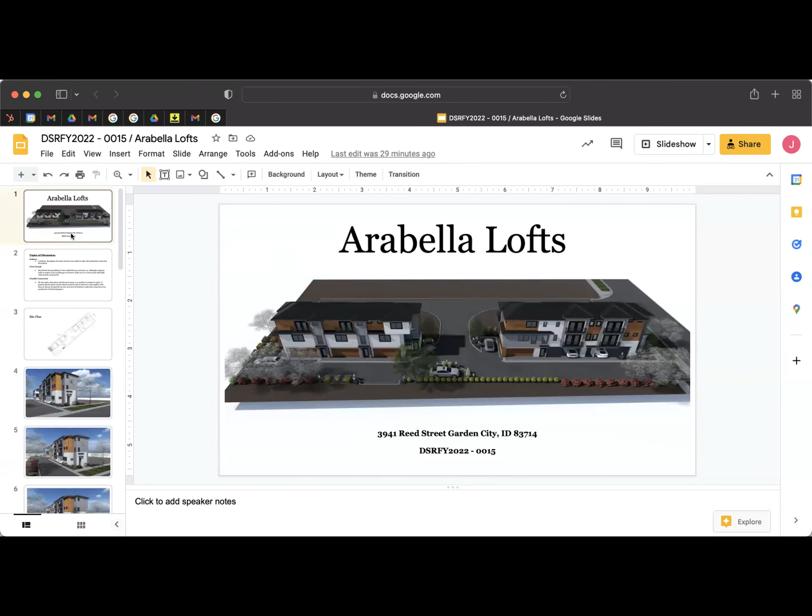To keep this brief, because we have talked about this project a couple times, things that we have addressed since the last design review hearing are the pathway that was asked to be provided throughout the subdivision. We have provided that all the way through, as well as addressed the front facade of the building facing Reed Street.

We also, from the last meeting to now, discovered that there's a possible connection point in the back that could help our back parking spaces, which were an initial discussion where there was an issue that they might be a little too difficult to back out of. But there is currently now a possibility to connect to a future development that is starting the process with Garden City next to us.

So we have been working with them. Nothing is finalized and we are farther along in the process than them, so we can't say this is 100% for sure, but we've worked with a couple of their teammates and overlaid our subdivisions to show that they could, and they almost do lay out perfectly. So that's just one thing I wanted to note.

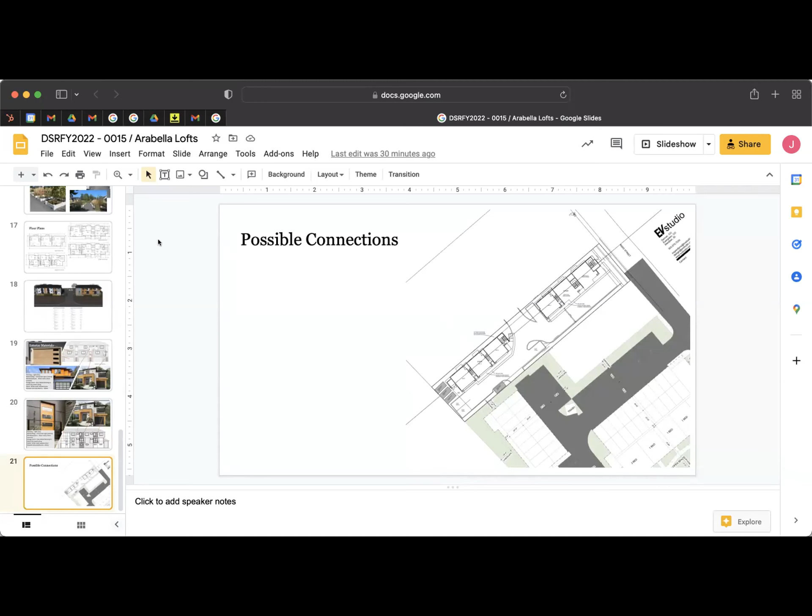But going back to some of the corrections that were made, the front facade of the building facing Reed Street, we have added the logo as well as the apartment or development name. It does appear a little small in the renderings, but as they're actually constructed, they will appear a lot larger on the building. We also added the awning over the entrance to the front, as well as some bike racks and the pathway that rolls all the way through the subdivision.

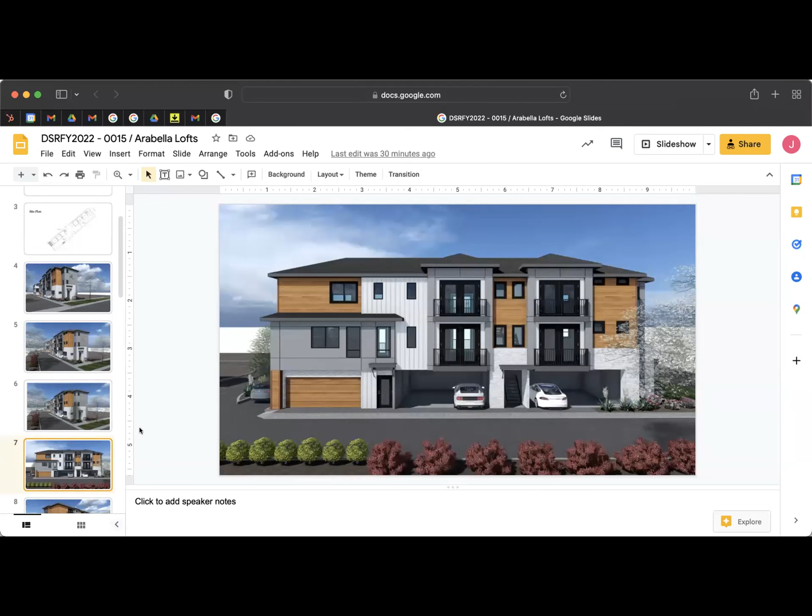But the pathway has been provided all the way through the subdivision and to the back entrance of the back building.

Lastly, it was requested that we show some renderings of the middle parking space, the island, the little landscape island that we have. So I provided a couple of those just to show some of the landscaping. We didn't do as much landscaping in this area now, knowing that there could potentially be a connection with that neighborhood or the development next to us. But this is currently what we have envisioned for this space, just so that when you're looking down, you're seeing landscaping and not so much of a car.

And those are the corrections that I have from our last design review.

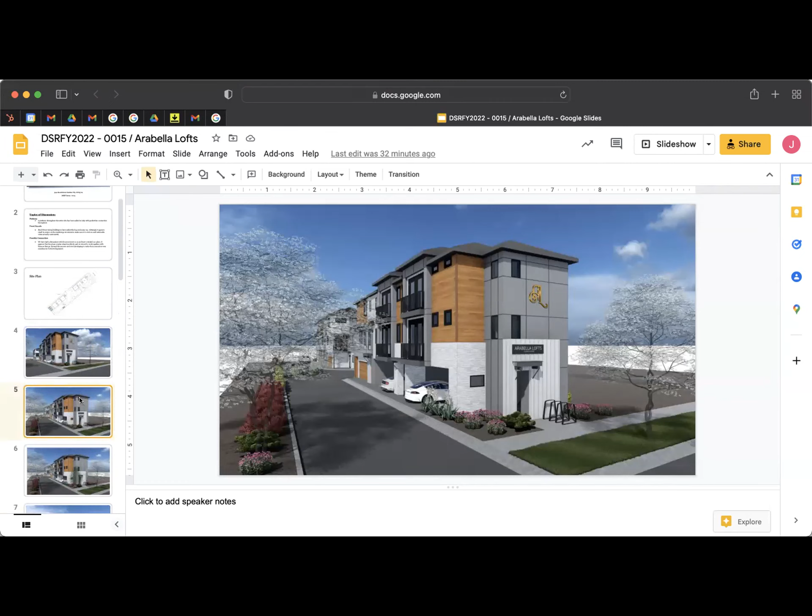Thank you. Any questions for Ms. Delgado? All right, seeing none, I'll turn it over to Ms. Veal for a staff report.

Good afternoon. I'll also keep my discussion a little bit sweet and to the point. There were new documents submitted on October 5th, 2022, in an attempt to resolve the outstanding code compliance issues and comments made by both the committee and the design review pre-application staff report.

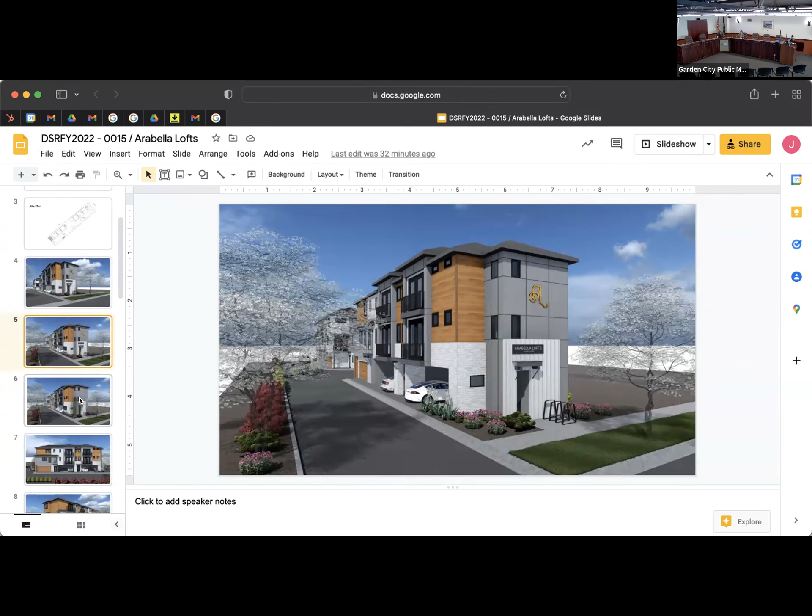The application does, however, remain non-compliant by not providing adequate common open spaces or the required street tree quantity or species. There are remaining discussions left to be had that include the front facade of that unit facing Reed Street, the perimeter landscaping, and the vehicular circulation and functionality, as well as that pedestrian connection through the common drive location.

And per code, these areas cannot count towards the minimum landscaping requirement of 5%. So in identifying these, as Jorre is showing on the screen right now, the green areas, most of it's in the setback, so it's showing non-compliance with this section of code.

Additionally, the site appears to be deficient at least one street tree. The tree proposed is a spring snow crab apple, which is not necessarily a qualifying or viable street tree, as the intent of a street tree is to provide high and wide branching canopy to allow for shade and environmental benefits.

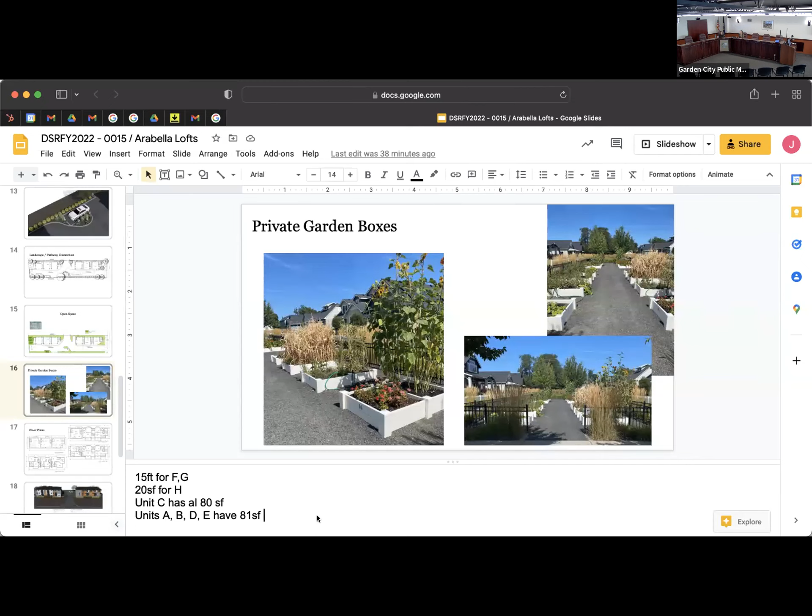I'd also like to note this wasn't included in the staff report, but it was included as part of the packet. Jorre, the applicant, mentioned coordination with that adjacent property owner. That adjacent property is considering a multifamily development. Nothing is solidified yet, it's just been in conversation with staff, and staff has reached out to both the applicant of this application and that future application of the adjacent property to try and coordinate at least some kind of vehicular connection, which Jorre also spoke to today.

Staff included a Word document converted to PDF, just to highlight the surrounding properties that are currently in construction or entitlement off of Reed Street. So we're seeing a lot of construction going on there, and it's just a way to show the committee as well as the public how that neighborhood has changed in the last year or two.

And with that, I stand for questions. Any questions by the committee for Ms. Veal?

Hanna, how much green space are they deficient, percentage wise?

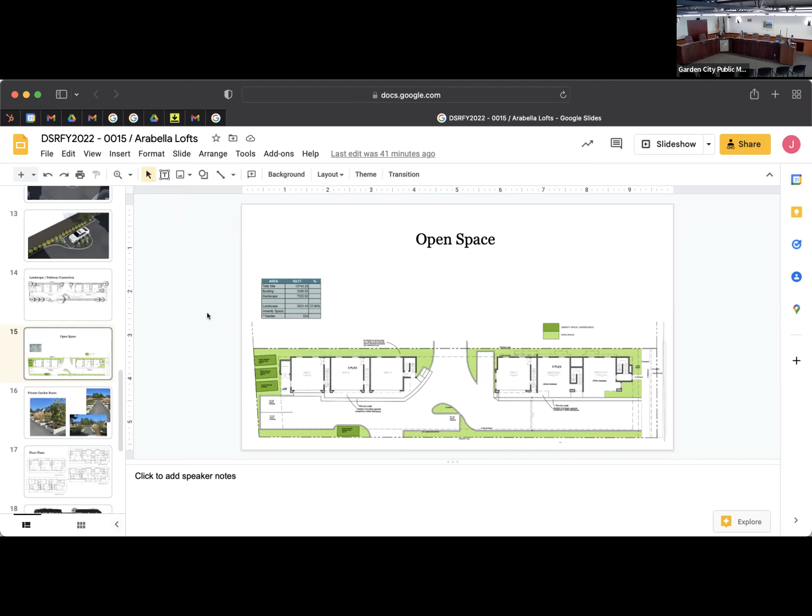And can private open space square footage requirements be in the setback? Yes, I believe so. So it checks that box, but not the other box. Got it.

Okay, all right. Not seeing further questions, so with that I'll open up the public testimony portion of the public hearing.

Is there anyone in person who wishes to testify on this matter? All right, seeing none. Is there anyone on Zoom who wishes to testify? If so, either utilize the raise your hand feature, or there are few enough people that you could go ahead and speak up.

All right, seeing none. I'll turn it back over to Ms. Delgado for any rebuttals she'd like to provide. I have none, thank you.

Thank you. And then I'll close the public hearing and turn it over to the committee members for discussion.

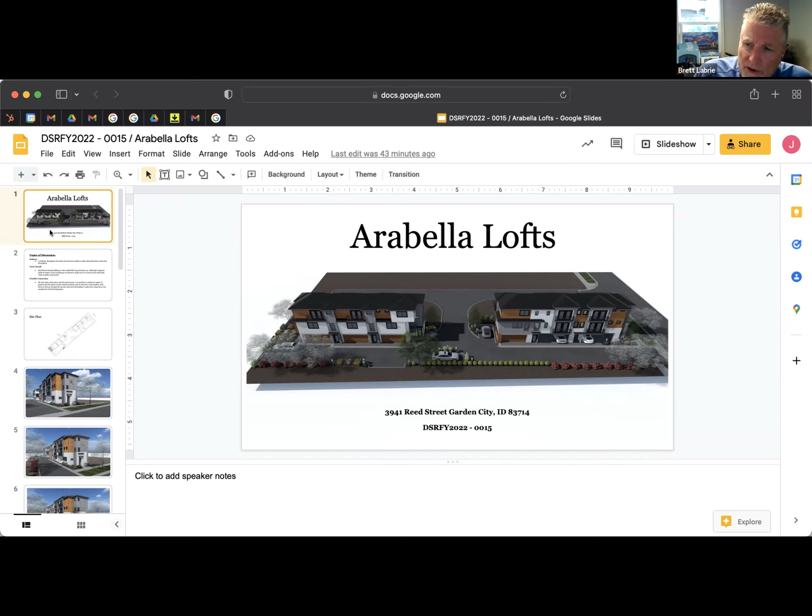So that's one item that I've got concerns with. The other one is this sidewalk connection. I don't see how it terminates into the sidewalk at the front of the development.

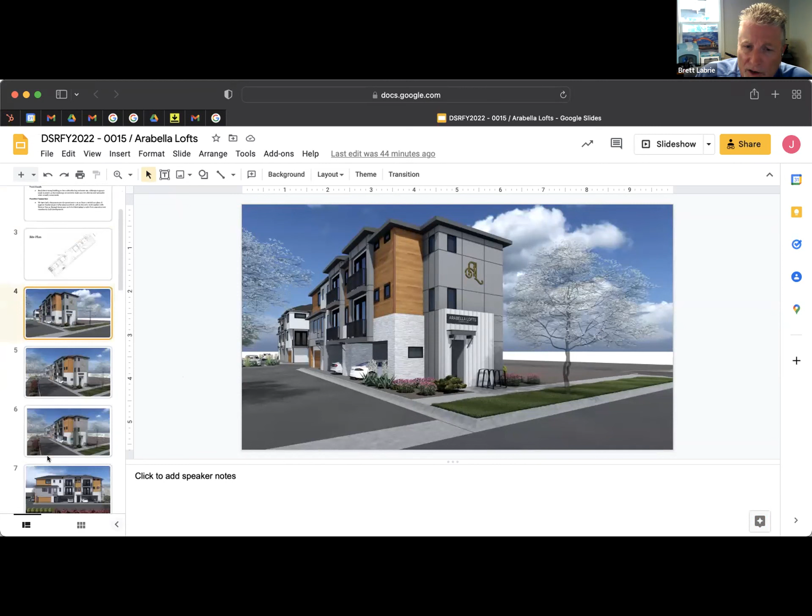It looks like there's landscaping that impedes somebody from accessing that. It also does not access the end unit. I think it kind of stops short of getting all the way back to where those garden beds are because of the parking at the very end. So it's disconnected. There's a sidewalk right there behind that car.

Well, is that the sidewalk or is that the rolled curb element? It was very difficult to understand from the civil drawings, and the landscape drawings were indicating this larger rolled curb and then sidewalk. So it's not clear to me where the sidewalk is and what's curb.

Yeah, so this pad of concrete actually comes out farther past this. Just the car kind of in this rendering is in the way. I could probably get a better rendering to show for that. I just don't have one right now. I could probably ask for a rendering that removes this car so you can see that pad comes all the way out.

So what is that little bump out on the rear there? Is that somebody's access? This is a mechanical room in the riser room. Okay, so it actually doesn't reach all the way to the garden, is what it looked like. But anyways, I'm just making sure that whatever connection spine is there actually goes the full way into the development. Yeah, this does connect, and that is just the riser room and mechanical area.

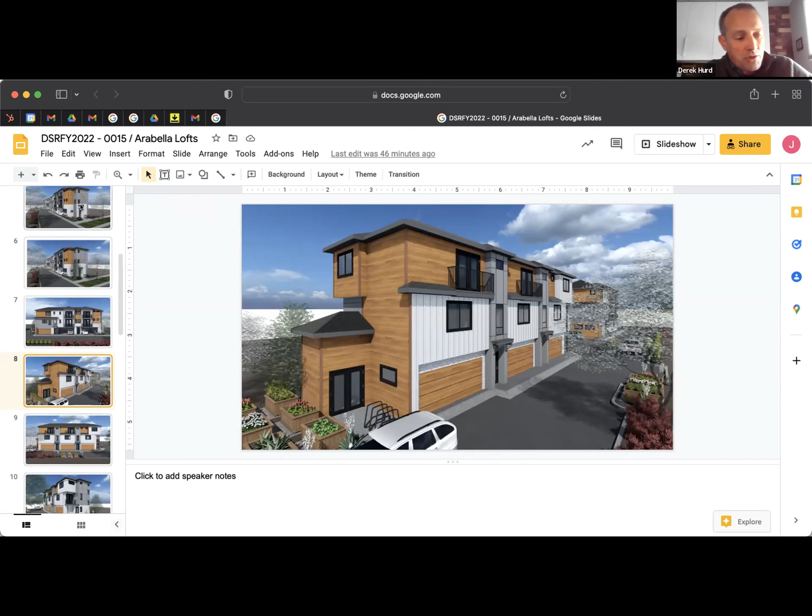Yeah, those were kind of my initial thoughts. Yep, and you hit all the big ones. My impression of the front elevation was the same as yours, that it almost took a step in another direction - now it looks commercial in essence, but it is missing.

It's still missing the street front engagement. There's no windows on the street front. It's just a blank door that goes basically to a stairwell. There's no eyes on the street in essence. So that end unit needs to be an end unit and engage with the street. And then all the other comments as well.

I read it the same way, Brett, that it looks like that sidewalk ends at the door to the last unit. And to me, it was like, okay, it's getting where it needs to go. It doesn't need to go beyond - the sidewalk doesn't need to go in front of the last garage because we've gotten to the front door, but...

you mentioning the community gardens and stuff, I think that does need to extend beyond. And it does read in the landscape plan from Stack Rock Group that sidewalk ends short of getting all the way down to the bed. So I think that needs to be addressed.

The landscaping around that parking island that's kind of dead center of the site, I think the landscaping around there is now satisfying the terminal view that used to just look at that car sitting in that parking spot. So I think that satisfies that.

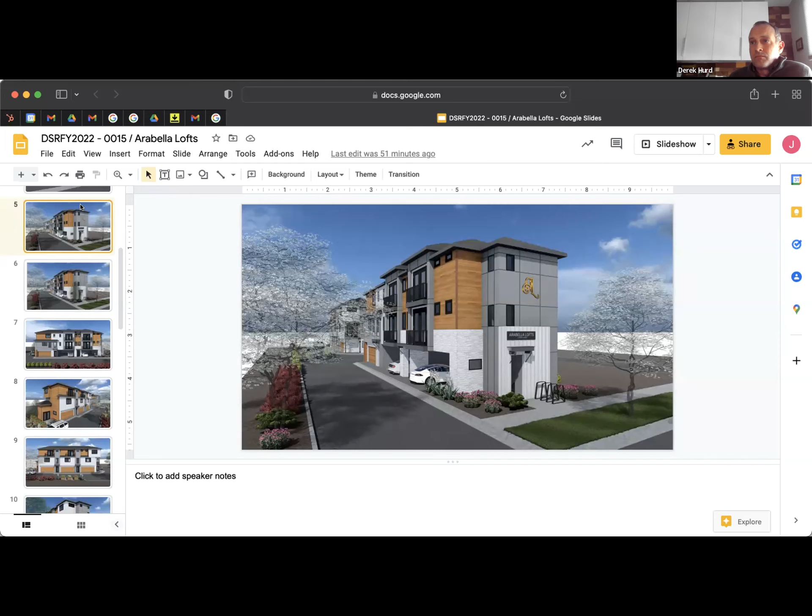All right, I'm hearing that perhaps... Oh, one more thing, Jenna, before you start, another comment I had. The bike parking right in front of the front entrance of the on-street unit might need some thought.

It's sounding like there is going to be a request to have this application come back with these items, unless the committee members redirect me and say that they think these can be conditioned. In future conditions, I might note that there could be a condition addressing the fact that there's still negotiation with the adjacent property—something along the lines that should cross connection be provided, a cross access easement is provided to the adjacent property, so that could be memorialized.

And then just a comment from me on the trees, especially the ones like the Franz Fontaine towards the rear. Certainly they're acceptable, but it would be nice to see a monument tree within the site to bring some of the softness that a large tree could provide. But I also want to acknowledge the applicant for endeavoring to work with the neighbors to connect the project to the adjacent projects.

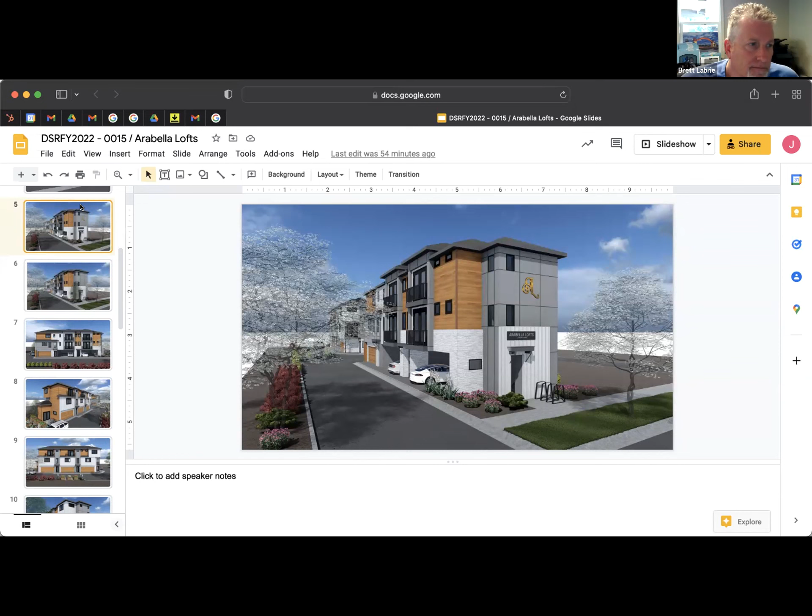Subdivision fiscal year 2022, number 4, Elle Estates. An application for a combined preliminary final plat processed as a planned unit development. Aria Orr is our applicant today, and the proposal is a 14 residential lot subdivision at 4800 North Adams. And with that, I pass it over to Aria.

Hello, and thank you for your time today to hear our application. This project is titled Elle Estates Subdivision and is located at 4800 North Adams Street. This project consists of 2 separate townhome buildings on the site. There will be 2 7-plexes for a total of 14 townhome units. Each of these units will be subdivided on its own lot. There is a mixture of 2-bedroom and 3-bedroom units, with each unit being 3 stories. There is a ground floor private 2-car garage for each unit, as well as a rooftop patio.

Our current setbacks are as follows. We have a front setback off of 38th Street of roughly 11 feet 4 inches, and a front setback off of Adams Street of 19 feet. For the interior side setback, we are requesting a waiver for 0 feet to allow for a common drive aisle to access each of the garages for each unit, as well as to construct a retaining wall along the north, east, and northwest property boundaries. We have a rear setback of 22 feet 5 inches to the building to the northwest of the property, and a 15-foot setback to the sidewalk along that property as well.

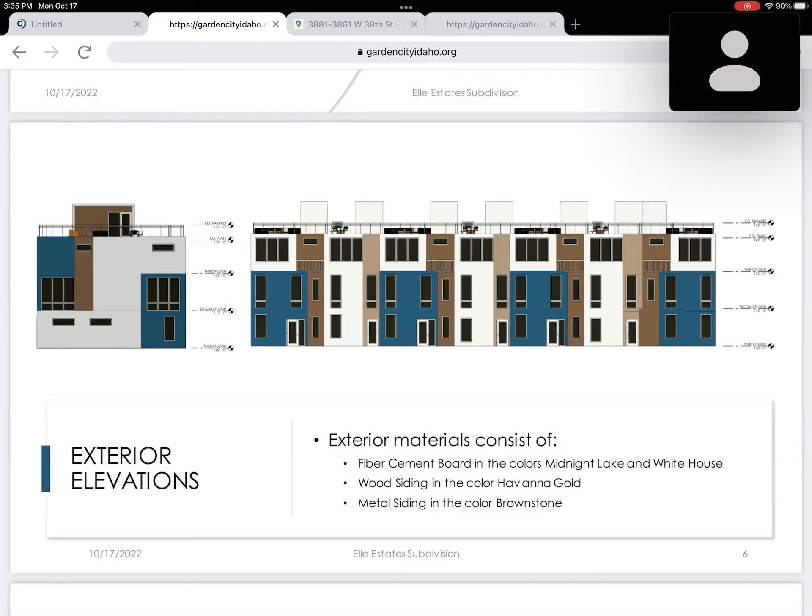And then the wood siding would be in the color Havana Gold, and metal siding in the color Brownstone. Hannah, if you move to the next slide, these are just elevations showing in between the townhome units, along that common drive aisle, where each unit can access their garages. And it would be the same colors and materials used on those elevations as well.

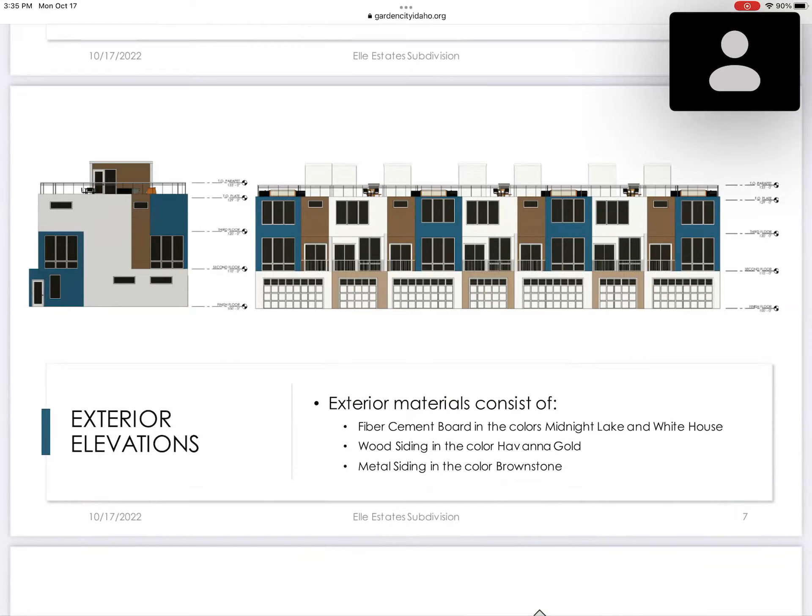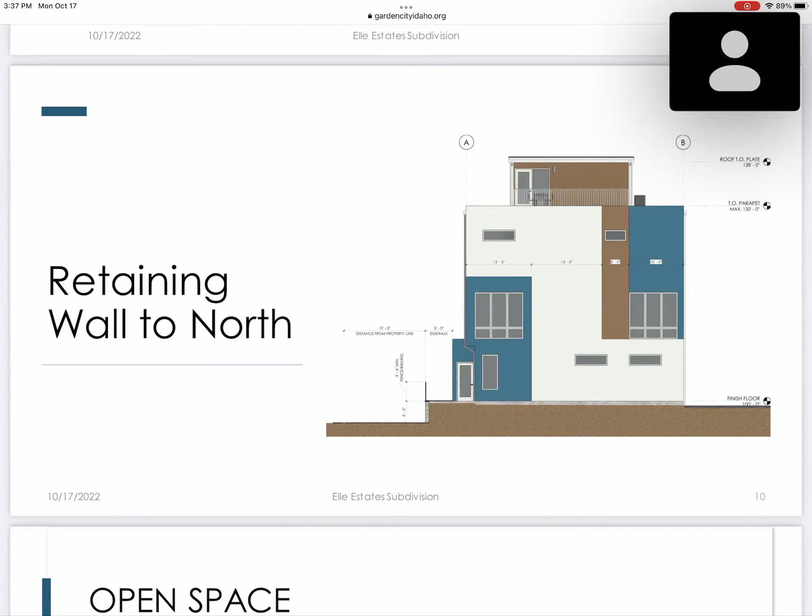Moving on to open space, we have a required 2,753 square foot minimum open space requirement. Currently, we are providing 2 forms of open space for this project, one being a pedestrian path along the north that's accessing those units, and also separating the units from that 15-foot setback. This path is proposed to be 5 foot in width and exceeds the minimum pedestrian pathway requirement of 80 feet, as we are providing roughly 140 feet of pathway.

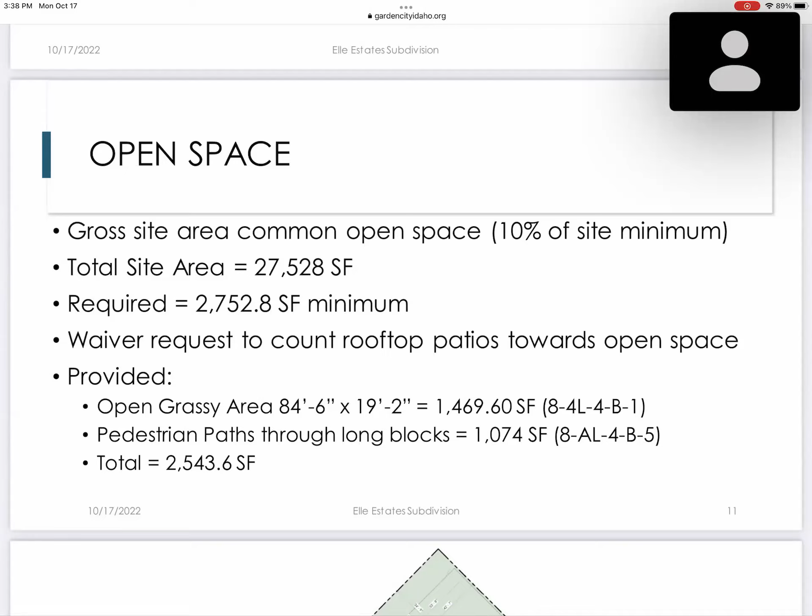Our second form of open space would come through an open grassy area along the front facing Adams Street, which would be roughly 1,400 square feet of open space. We are providing a total of 2,500 square feet of open space, which does not meet that minimum. We are also requesting that rooftop patios be counted towards the open space, as each unit does have that private access to their own rooftop space.

Moving on to the next slide, this is just showing where we have those open spaces located on the property. And that is the project that we are presenting, and I stand for any questions.

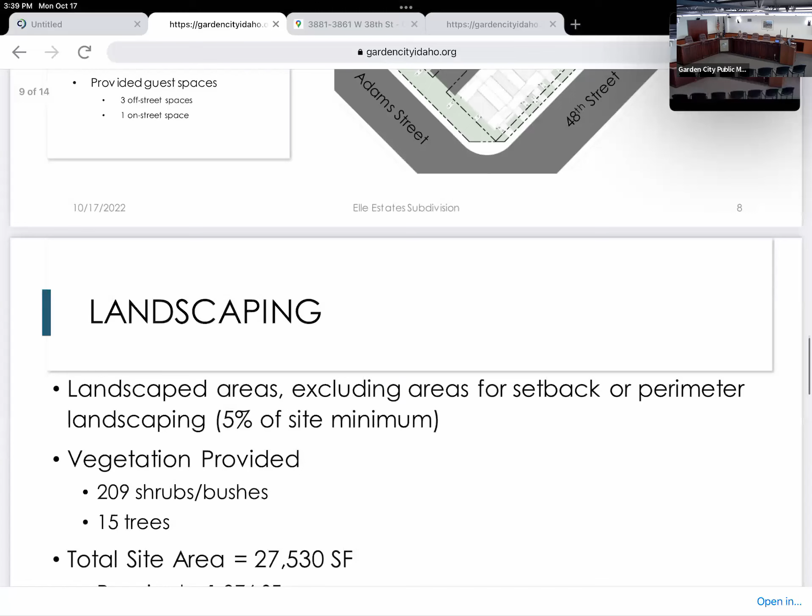Good afternoon. This is an application called Sub Fee 2022-0004. It is a subdivision application located in the R3 zoning district, the Main Street corridor, and the mixed use commercial future land use designation of the comprehensive plan. The subdivision application is also to be processed as a planned unit development application.

As a planned unit development, the applicant can submit waivers to code standards. However, in the initial submittal, they had only formally requested one. Since then, staff has been able to analyze the submittal packet and has drafted, I believe, 6 different waiver requests, and I will list them here.

The first is a waiver to setbacks, so they are asking for a 0-foot side setback and a 5-foot rear setback. There is also a waiver to allow for more than 4 dwelling units being served off of a common drive, allowing for the 14 units to be served off that common drive.

They are also asking for a guest parking space waiver, allowing for only 3 guest parking spaces as opposed to the 7. And then they're also asking for a parking stall dimensional standard waiver, allowing for 9-foot by 18-foot parking stalls. Code requires a 10 by 20.

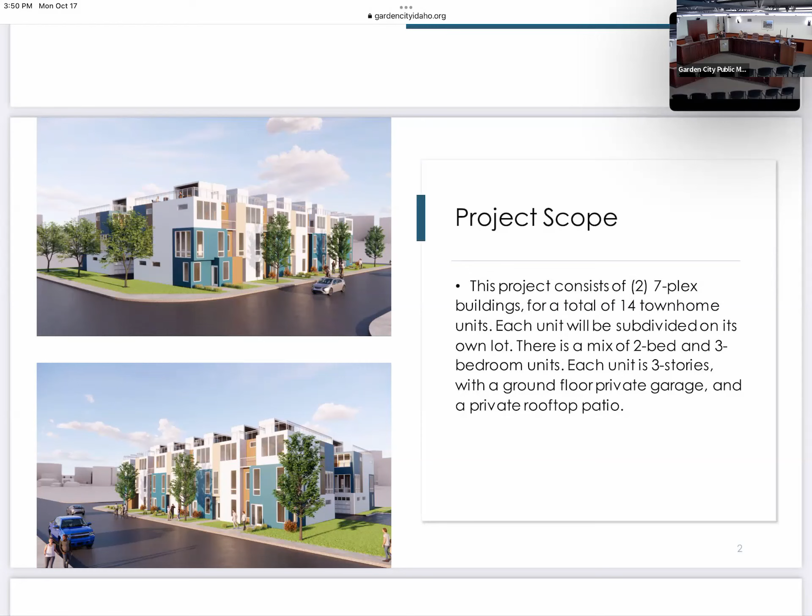Okay, so do we not have perimeter landscaping required on the west? Are those just residences? What I'm showing on the screen right now is there's about a 14-foot 8-inch setback. If you can read it, that is the required access easement, or the discussed access easement. So that was not going to be perimeter landscaping anyway, even though code would have required it. So the site with the pedestrian pathway, that access easement and lack of space for perimeter landscaping was not code compliant. But with that adjacent property that entails the access easement no longer being a commercial use, the perimeter landscaping is not required along that western property boundary line.

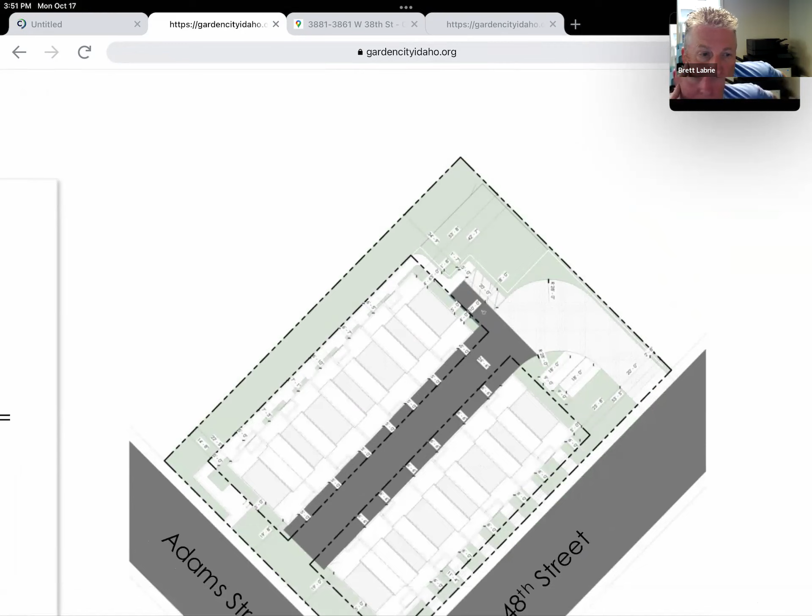Okay, what about the north? Is there anything required along the north boundary, where the drive entrance is? Let me see - I believe to the north it's residential properties, in which case it would not require perimeter landscaping. So we had someone from the audience say that to the north is a mobile home park, which we would consider residential, which would not require perimeter landscaping.

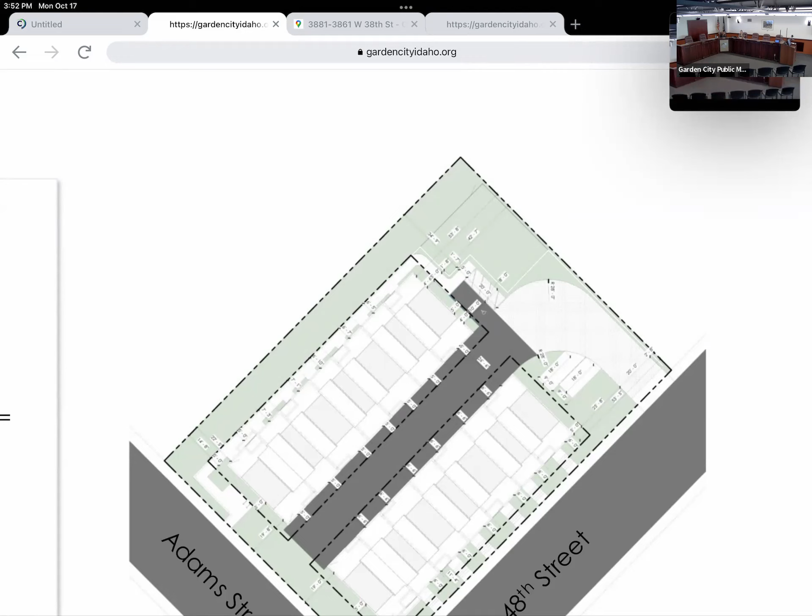Additionally, there are questions regarding the common open space that was calculated in the site plans, as there are minimal dimensional standards for common open space. For example, it needs to be at least 400 square feet in area with a minimum length and width dimension of 20 feet. So only a 20 by 20 common open space can count towards that common open space requirement.

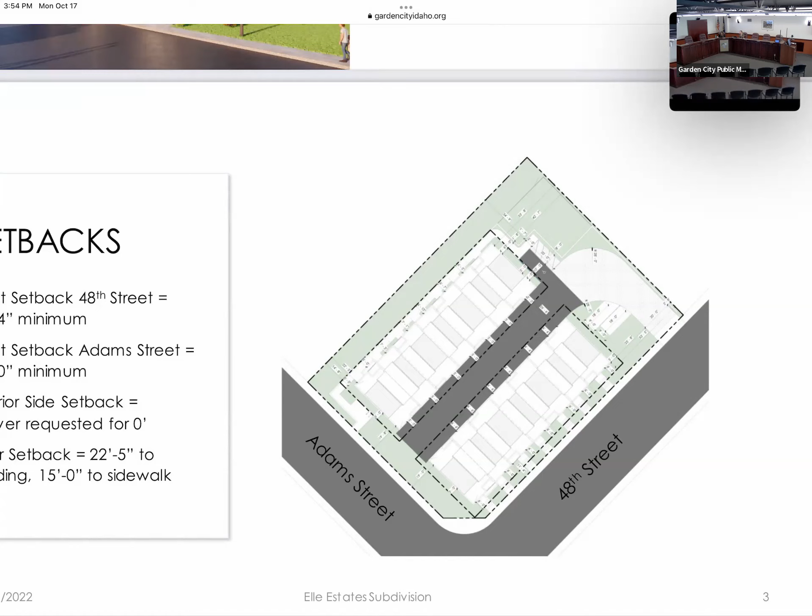Just a quick question on the common open area - where is the common open area calculated now? Is it just some of the lawn spaces? Correct, yeah. And what about the drainage facility - is that just calculated as something separate, or is that going towards landscape area as well?

I would have to look at the plans submitted specifically to remind myself.

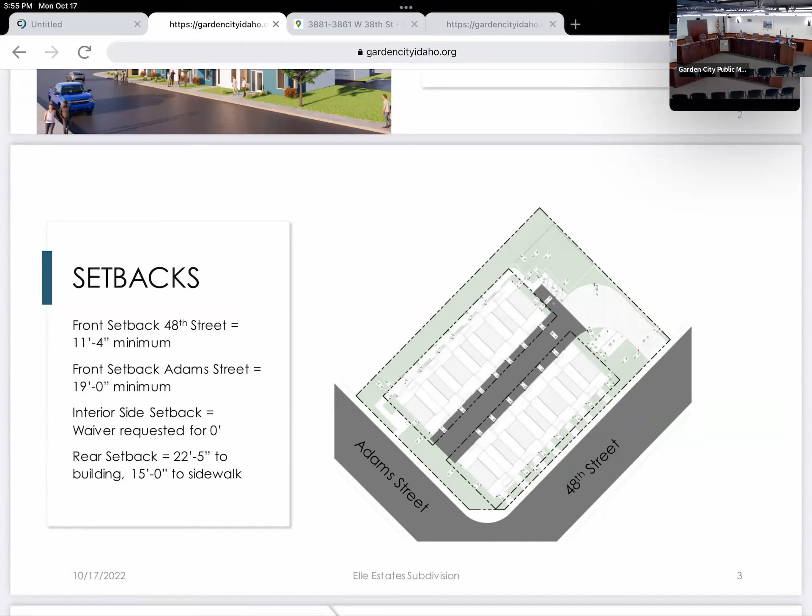But the stormwater swales—I believe they do count towards landscaping requirements, but they wouldn't be counted towards common open space. I would have to look into that code more in detail. Yeah, I think if they're done correctly, they can be utilized as common open space.

I've seen that space utilized for lots of different things, even little dog park run-around areas. All kinds of stuff like that. When you have a storm event it's not being used at that point, but every other time it can be. So if they aren't calculating that, that should be considered, and then designed as such.

Just to clarify, it does say that stormwater facilities, when designed in accordance with Article A, general provisions of the chapter, can be utilized. Perfect. Right.

Seeing no other questions for staff, I'll open it up for public testimony, and I'll call on Justin Frieden first. Yes, please.

Thank you very much. My name is Justin Frieden, Fredin. I'm an attorney with the firm of Hawley Troxell Ennis & Hawley, 877 Main Street, Suite 200 in Boise, 83702. I am here on behalf of Bliss Properties LLC, which owns the adjacent property located at 4810 North Adams Street. My sole purpose in appearing here today is to protect the easement that we've discussed already briefly on the applicant's property that provides access to my client's property. More specifically, this is a 15-foot wide easement on the applicant's property, parallel to the boundary line between the two properties, which provides the only vehicular access to my client's property.

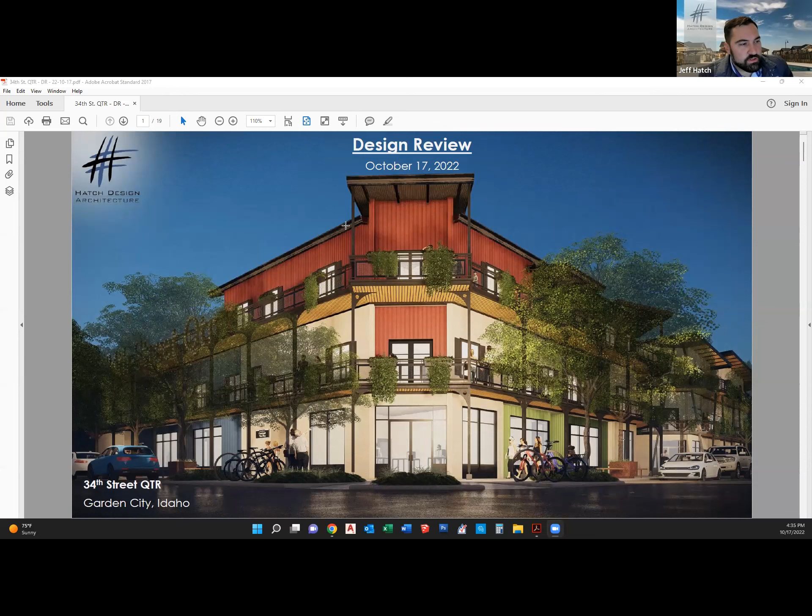One of the considerations that the design review committee requested and challenged us to work on was the residential entries. At the ground level, the consideration was making sure we have an appropriate space that reads as a residential area. With that comes two considerations: one, safety and understanding that this is a private area and not public, and the other is just the function of the space.

If we're going to have a mail room, it's likely with the amount of units we have here that people will be dropping off packages. If we just leave an open air staircase, it leads to some interpretation of how that's actually going to function. So in talking with the owner, we've come up with a couple of different options for engaging that and incorporating a mail room.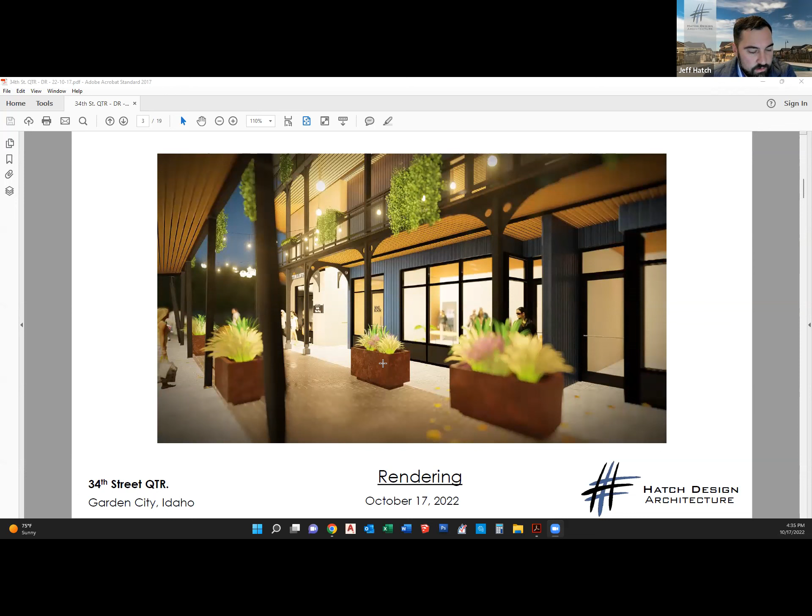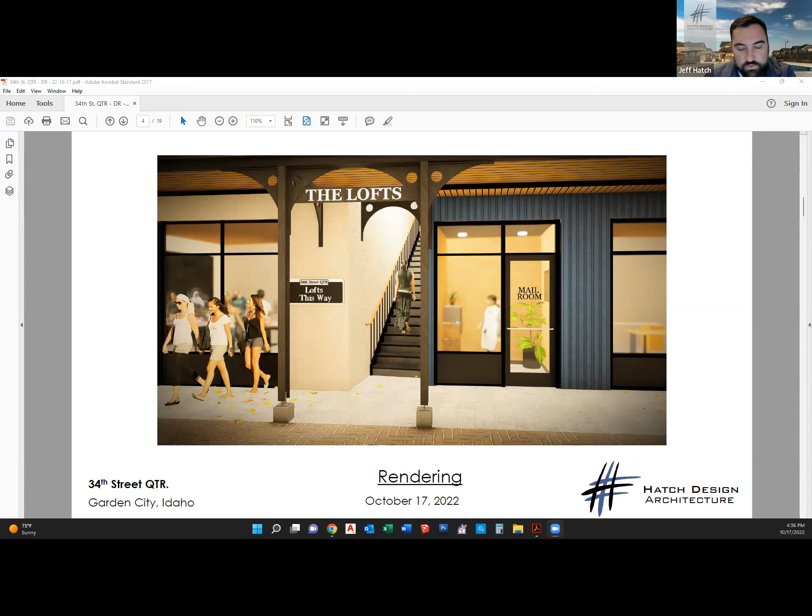The first option is we would have a dedicated mail room area, and then we would have our open staircase. We would have signage indicating that as the access for the lofts, and then they would have their private access for the mail room. Here's another view of that option.

In our next iteration, we've done almost the same thing, except we've added a little bit wider area, and we feel this notch creates a more defined space that feels more like an intended opening—a pause to say this is an entrance to a different transitional area. You can see the same mailroom, same entry, but we've pulled the signage back and made that separate from the more commercial frontage walkway. Here's another view of that.

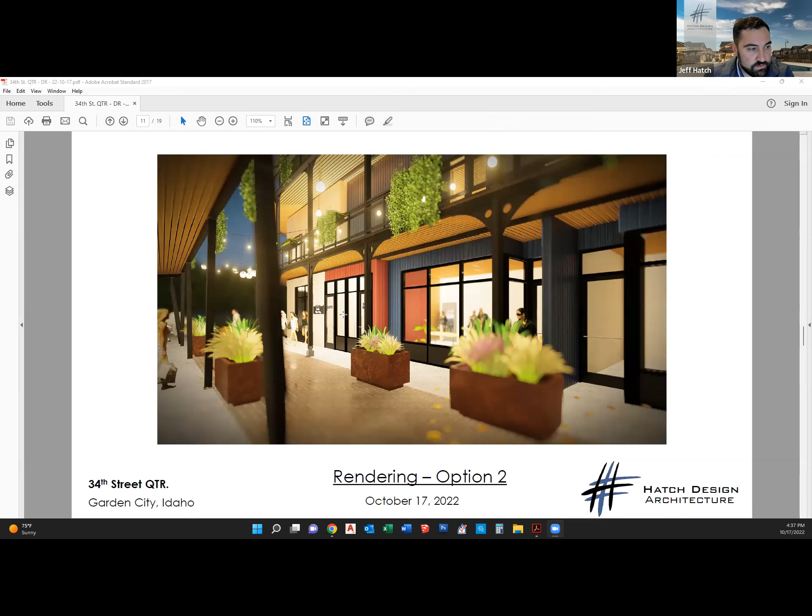From there, we went a step further and said that reads to some extent, but it still feels like just a staircase out there. What can we do to go a step further and achieve more of a residential feel? So in this iteration, we've actually enclosed both the mailroom and the stair with storefront. In doing so, we've gotten an open air lobby to the upstairs, but it's secured from the general public. You can see this storefront and signage dedicated to those lofts—here we have the mailroom with the lobby and stairs going up, and another view.

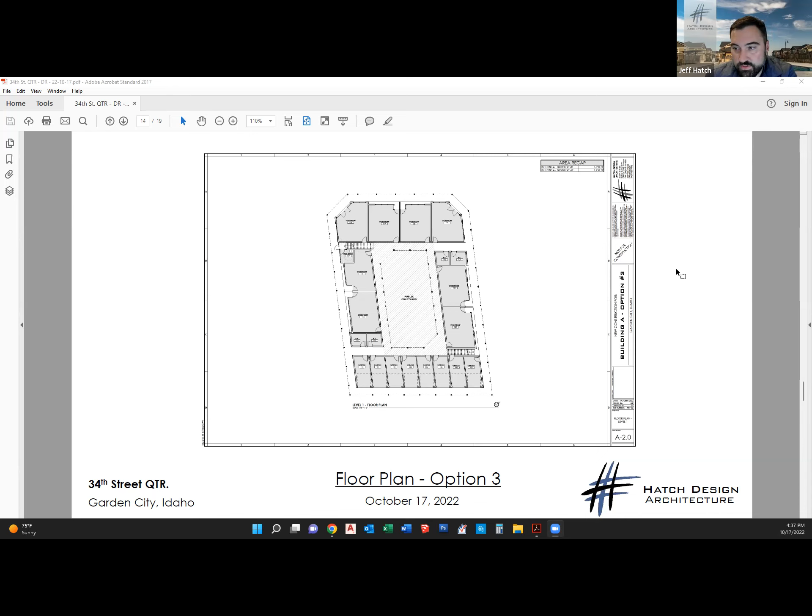And then lastly, we have a similar concept, except the access for the mailroom is secured. So if you had guests and visitors, they would be able to come and go, but access to that mailroom is just for the residents. Similar appearance on the front. Consideration would be that you'd have this door separating the mailroom from the balance, having just one designated door at the residential access versus having the two.

So in summary, we have our first iteration of the mailroom, the open. We have the mailroom with the notch. We have the mailroom and the stairs merged. And then we have the mailroom separate with a single access leading up to the lofts. And with that, I'll stand for any questions.

Hey Jeff, can you pull up a site plan and show me which each of the entrances are? That's the first thing. And then is there a mailroom at each entrance, one for each building? There would be a mailroom for each of the individual projects, so 2 mailrooms currently proposed. For each building, yes. The quantity doesn't really merit having them at each staircase, we would just have them per building. Okay, and then as far as your request, let me pull up the site plan one moment.

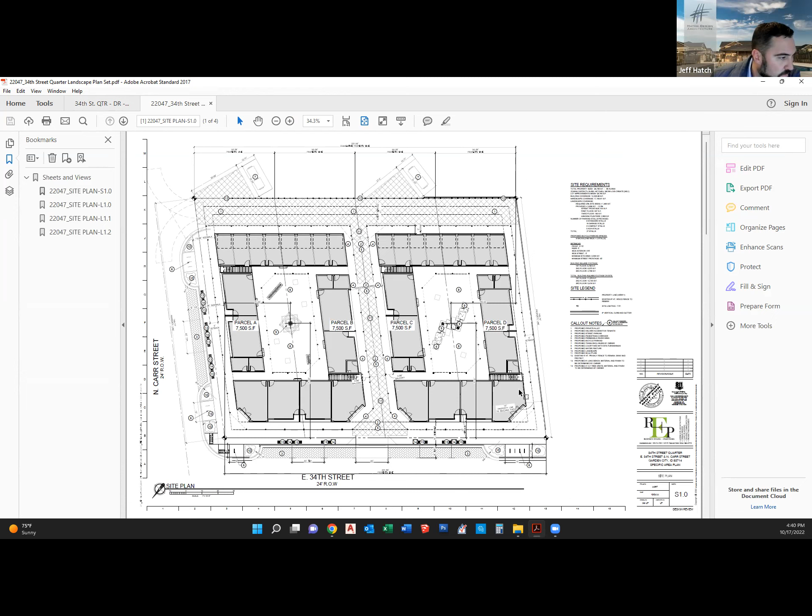So as you can see here, engaging the street, we would have that proposed mailroom be on the street facing side, in order that if you have Amazon packages and things, they can park. Is that a street over there on that side? I'm all turned around. Yeah, you might be turned around there, Jeff. Yeah, that's the common lot, right? Yes, from our coordination meeting with the client, their intention would be to have the mailroom located on the street facing side. In this case we have cars over here, and so we would want that so that if you have a delivery vehicle, they can park and easily access that for packages.

From a visibility standpoint, having it on the street is a little bit easier. Now as far as the second building, I think we're open to suggestions if that is also on the side of the building mirroring the original, or if we propose that to be internal to the side along this common driveway. We'd probably put it on the rear so that it's easily accessible from the alleyway side, but we did definitely want to make sure this one was located, and the intent would be that it is shown here.

Okay, yeah, I guess I can see that one because it's on the street, yes, to have that direct connection and visual connection, but the other one doesn't get that because of where it is. It's either on a common lot line on that side of the building, so it's going to be a little bit removed, a little bit hidden. I think I threw out a suggestion in the last meeting that maybe a thought might be to look at having those main pedestrian access points on that inside walkable pedestrian spine, so you almost create both of those entrances kind of get the same thing.

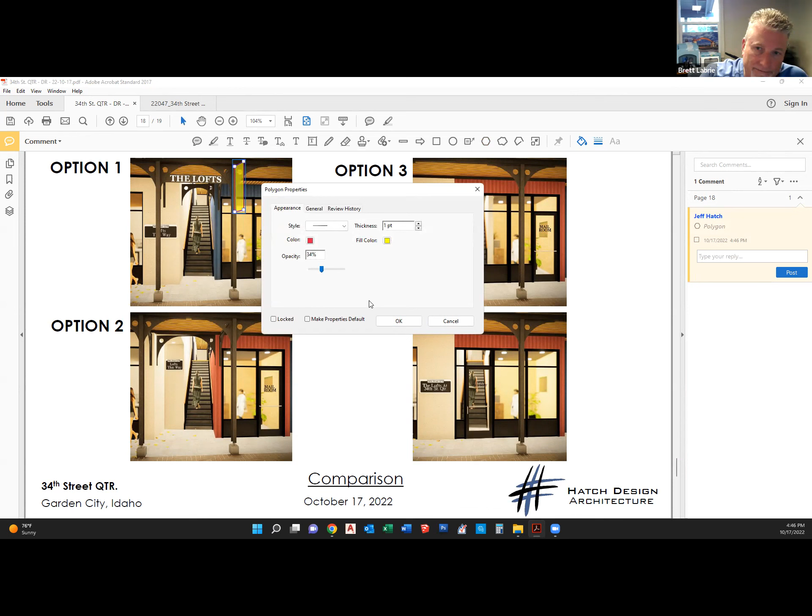Maybe at like 90 degrees to that, Brett. Yeah, and maybe since primarily people would be coming from that direction, maybe your option 2 down there, I don't know if there's something you do because you got that little recessed niche that maybe that gets some signage. You see how the recessed niche is on the side of the stairwell?

Yeah, so maybe that plane and the other plane that is perpendicular have some kind of artistic signage. That plane and then the other one, this one here, maybe that incorporates some kind of artistic signage element that creates some identity to that little negative space there.

I think that could be really cool, it would be subtle but it would also be really effective too. Yeah, I like bringing them together as well, I think that's going to be a stronger thing.

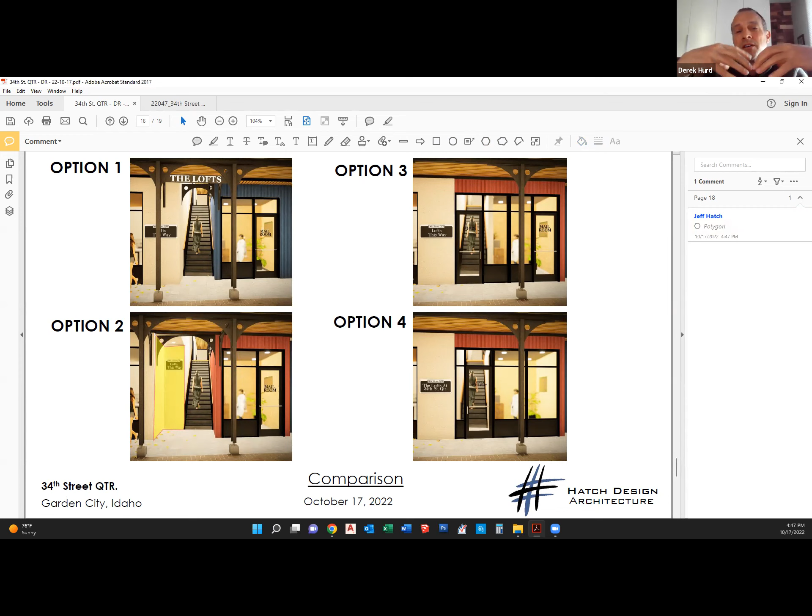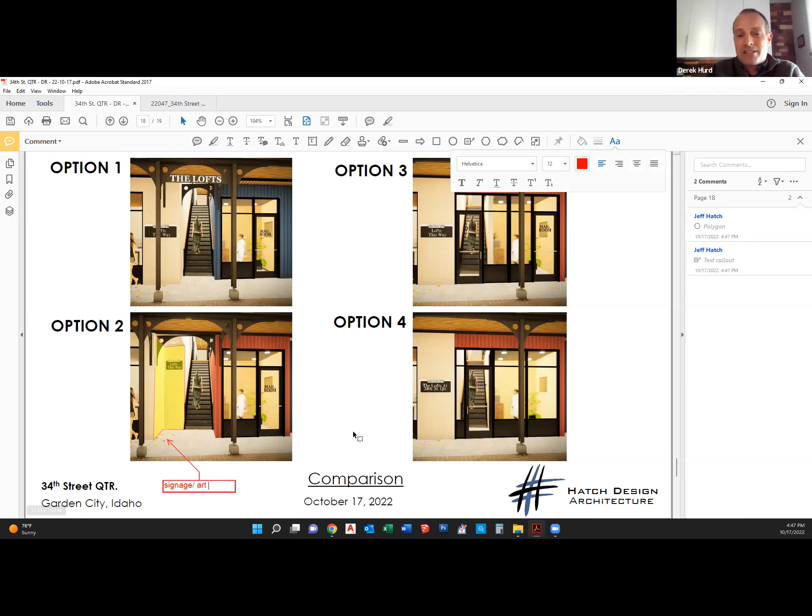And Brett, your comment that we've become a pedestrian, so we are going to see this and it's going to be more obvious because we're now walking, right? In a lot of projects we want it to be that car scale, going by at speed, like where is the residential entry, I'm looking for it on my bike or in a car. But we've removed the person from the car and now we're walking, so it's a less obvious big architectural statement and more of a, oh, here I am, it's right next to me, I'm on foot, I'm going slow.

So I think the material choice on whatever clads that mailroom element plays into that part. It's not just the same thing we've used everywhere to make it look like it's just another portion of the building. It kind of creates this identifiable entry component, with different materials that work into the overall palette but set it apart, not just the same colors of metal panel.

So Commissioner Hurd, as a consideration, make sure I understand what you're saying, this art signage or whatever ends up being here could be carried through on this back wall too, so that space feels connected. Well, I was just seeing where you have the same red corrugated panel and then the blue up top in option 1, but that's the same material you've been using all around the building. Maybe this is an opportunity to utilize a different material that really calls attention to that entry element at the pedestrian level there, something unique.

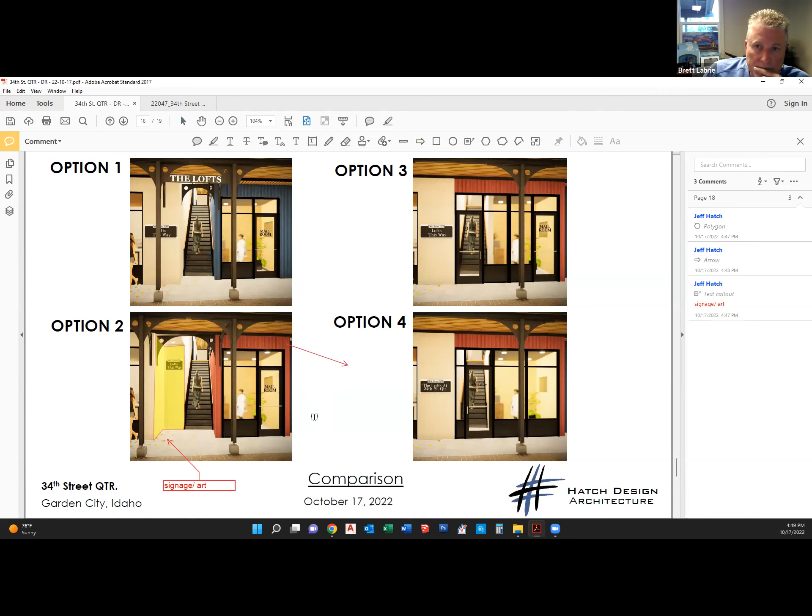And then I think with those, it addresses creating its own identity, and it does it in a way that's, you know, just at that pedestrian level.

So what I'm hearing from Commissioner Labrie is that option 2 is probably favorable with a couple additional selections. Commissioner Hurd, does that seem right? I'm in agreement. I like the recess, the negative, and the open stair for sure.

And you have an opportunity to think about how they're both going to talk to each other too, the two residential entries, because it's kind of the same form and the same function. So if that's triggering us as we're walking down, like there's entries, which entry do I want? They can kind of be the same thing, but have their own voice because it is two different projects.

Yeah, understood. And then for the stairwell that doesn't have the mailroom connected to it, we would still have that same language and signage, things of that nature. And then we would just want to be mindful of the materiality that connects those two. Does that seem right? And those are on the opposite sides of the building, right? Yes, correct. I think so, yeah.

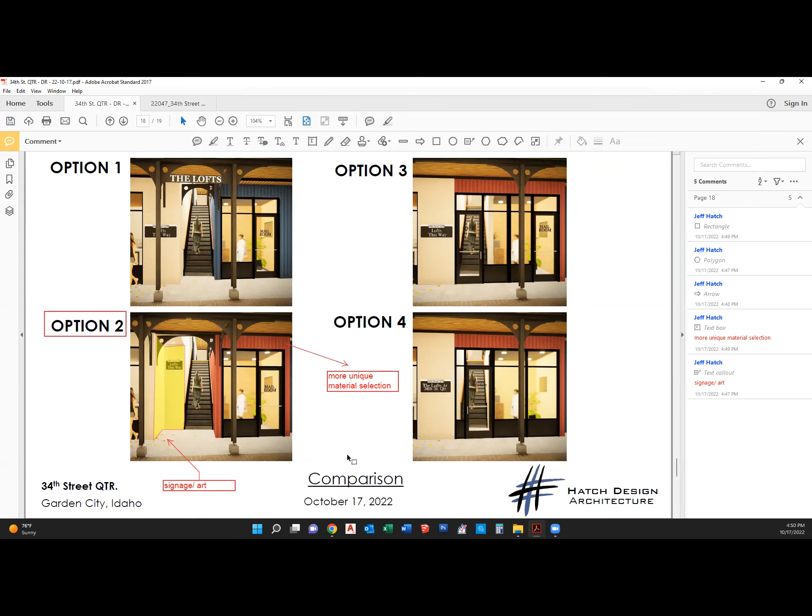I have to say, I really liked the idea of pulling the art all the way through on the interior.

We technically are in a public hearing still, and I think this has all been counted towards part of the applicant's presentation. You certainly can have more dialogue and questions with the applicant, but if you're ready, I can turn it over to Ms. Veal for a staff report.

Sure. So this application, as you know, has chosen to apply the Live Work Create overlay. There are a total of 16 live units with a total of 16 work units. However, they do not appear to have a direct connection between the live and the work spaces.

There are on-street permeable pavers shown as the chosen stormwater treatment method for ACHD right-of-way, and there could be potential conflict with the street trees, as I will go into further in this report. There also is potential conflict with the trash enclosure being a shared unit due to the capacity, the location, and the longevity of the agreements that are required to ensure that this is legal. Republic Services and the Garden City Utility and Billing Office officials have issues regarding the shared refuse.

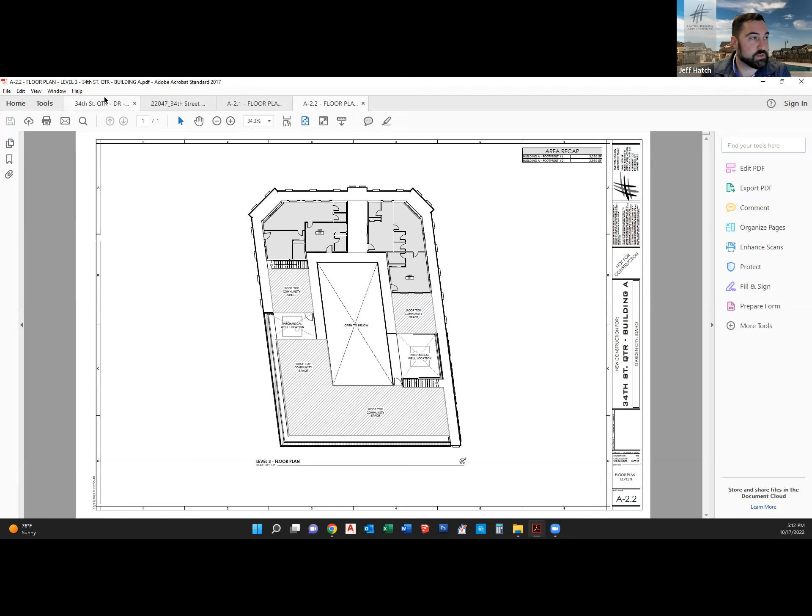As far as the street trees go, I think there's a couple different ways to address that, which can be done conditionally if the commission feels that's appropriate. In some cases, our adjacency of 10 feet to the actual stormwater area is such that we could move that and still not impede in our sightlines. In other areas, we can relocate the street tree, still maintaining plenty of sufficient walking path, but being able to separate that from that 10-foot requirement. So I think the combination of those two strategies should be pretty easy to relieve that concern.

So you're saying push it to the back side of the sidewalk? Our sidewalk is effectively about almost 14 feet wide. So right now, we would be able to accommodate that within essentially the center plaza portion of that larger sidewalk, still accommodating our 5-foot walkway underneath the canopy and still allowing for the walkway on the other side of that tree, especially if we look at more of a flush mount grate system versus something that's elevated.

Let me add to that. I think in our talks with ACHD, there's some possibility of just connecting to the existing system, which is what Casino Beach ended up doing, in which case we would just not use the permeable pavers at all. There's also the chance of using permeable pavers in smaller locations so that you can still get enough drainage yet move those permeable pavers further from the trees so that ACHD is satisfied. So really, I think we're leaning toward just connecting to the existing system because it is right there at 34th Street. And if that's able to happen, then we won't have permeable pavers at all, and the trees will stay right where they are.

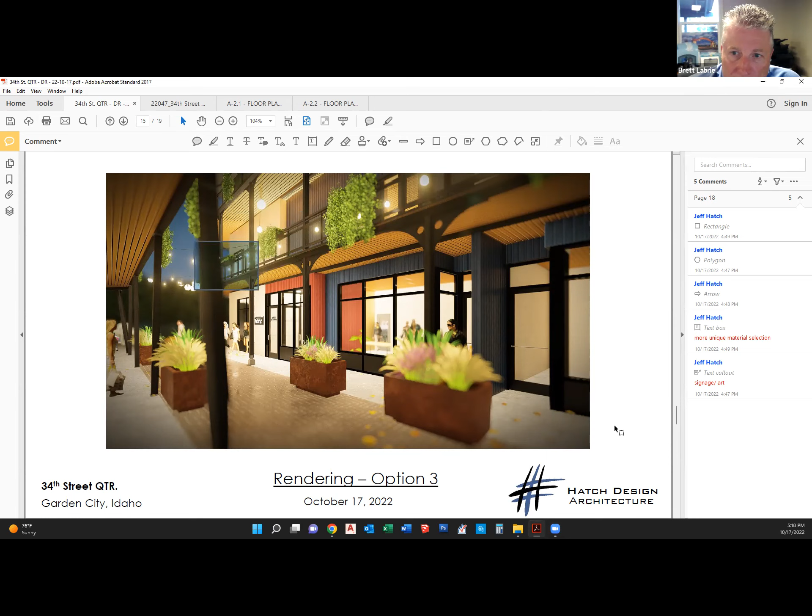Yeah, I mean, I think our hope is to have permanent baskets there. I think last time you said if they were permanent and welded into place, that's the part that they need to be integrated into the building components. So if it's integral to that railing system to where it couldn't be removed easily, then in my opinion that could be looked at as part of that permanent landscaping.

Well, and I think Brett, I don't speak for all of it, but I think there's some thought that maybe these will end up being condoed and that there will be some sort of association that actually does the management of the landscaping. So you will not actually own the thing hanging off the balcony if you own the unit next to it. It's not something you can even legally remove.

Yeah, and I think that's critical, that it's irrigated and treated just like any other landscaping element. Yeah, and it's designed as such too. It's designed as part of the overall look. It's not tacked on.

I don't think that, when I was looking at the potential conditions, it really indicated that. I think we need it to be permanent, so I want to add that in there. Yeah, Brett, I do think we added it into the language of our application. So it's probably in our application, but we can certainly add it as a condition.

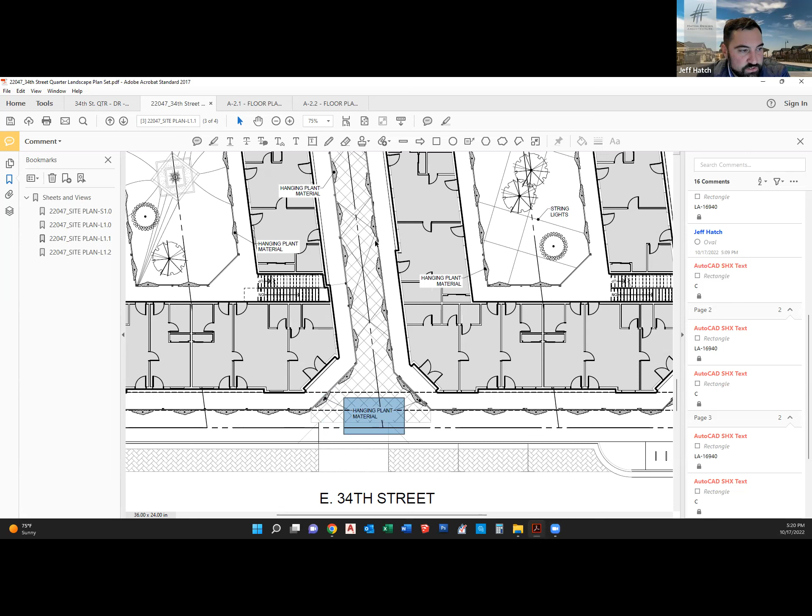It's not that hidden, so I was just looking. Oh, you found it, okay. It says hanging plant material, but nothing that says it's a permanent planter. So I think it's actually in her notes maybe, and that's something that can be verified in the actual details of it. Well, like I said, it can just be added as a condition if we can't locate it. So I think that's fine.

I might note that condition number 4 does note that they have to be live material and automatically irrigated. That could also include that they need to be permanent and integrated into the building materials or structure, either way. And I might also suggest, as mentioned by Mr. Jones, that the CC&Rs would take those over, so that could also be part of that condition, that it's part of overall ownership instead of individual ownership. We would be happy with that.

One other thing to note that we haven't discussed as a committee before, and it's not specific in our code, but I thought it was interesting in reviewing the City of Boise's streetscape manual: they note that every tree is required to have 500 cubic feet of soil dedicated to the street trees so they won't die quickly. I don't know what that would equate to if you opened up the tree grates, but I might suggest that might be something to strive towards. Again, it's not a code requirement.

So this is a bird's eye view of the sandbar restaurant. In the back, you will see the pool bodies with this pool house structure, and then the polycarbonate roof. Currently, the polycarbonate roof is being designed to be hollow structural steel, HSS steel members with low corrosion.

And we're looking at the potential of having an operable roof, but we are still working through the engineering of that to see how feasible it is. But that's the goal with that.

And the structure surrounding that is going to be made out of tinted concrete, which, in our minds, is planned to correspond with sandstone features that are highlighted throughout the facility, where we have natural sandstone elements. And then on the front side of the building, we have sandstone cladding elements. We have some other materials that are sandstone color, a honed CMU block.

And so with this pool structure, due to corrosion concerns within immediate proximity to the pool, we're looking at doing an integrated color concrete, and having that structure be resistant to corrosion and efflorescence.

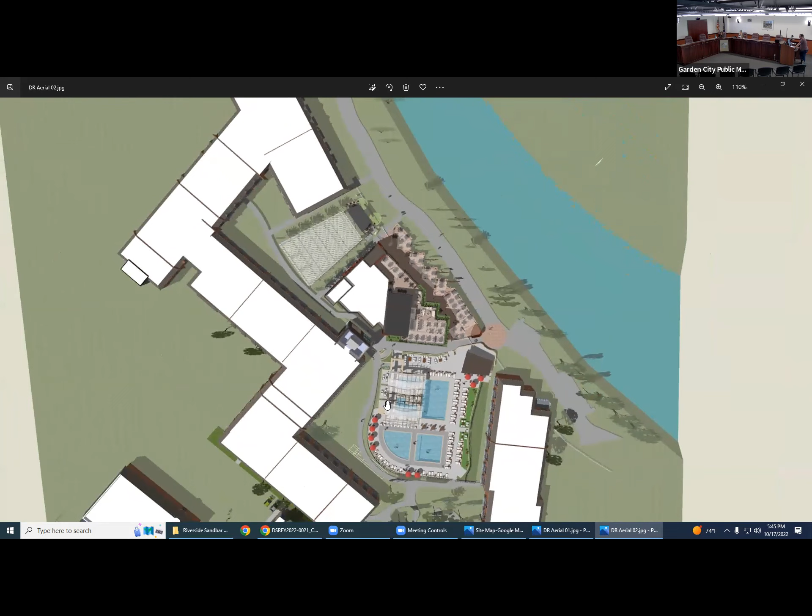So those nodes are this node off the green belt and this central node, which is the main vertex where all these pathways meet, right in the center there, and also where the elevator and the entrance 11 stair empties out onto this circular node. The node captures some elevation gain.

We are raising the footprint of the sandbar 1.6 feet above the current grade, which meets the new FEMA floodplain requirements. And so with that, we are also elevating this sidewalk and then having to slope down to meet the grade of the green belt over at this node. And then we have a slow transition from here, eventually having a stair down to the Greenbelt meeting point.

And then we have ADA access to this outdoor dining space from a flush transition here, with no elevation transition in the floor surface. And then we have the flush transition from the Greenbelt onto the patio through the building.

We have a vault here that will be a utility vault for pulling equipment from the basement below. The basement is planned as an L-shape that carries the pool equipment and other utilitarian functions. There's an access point for vehicles, and we're holding this wall back so they can lift heating boilers for the hot tubs and snow melt system out of that vault long term if needed. Just a quick point in case you're curious what's going on with this corner.

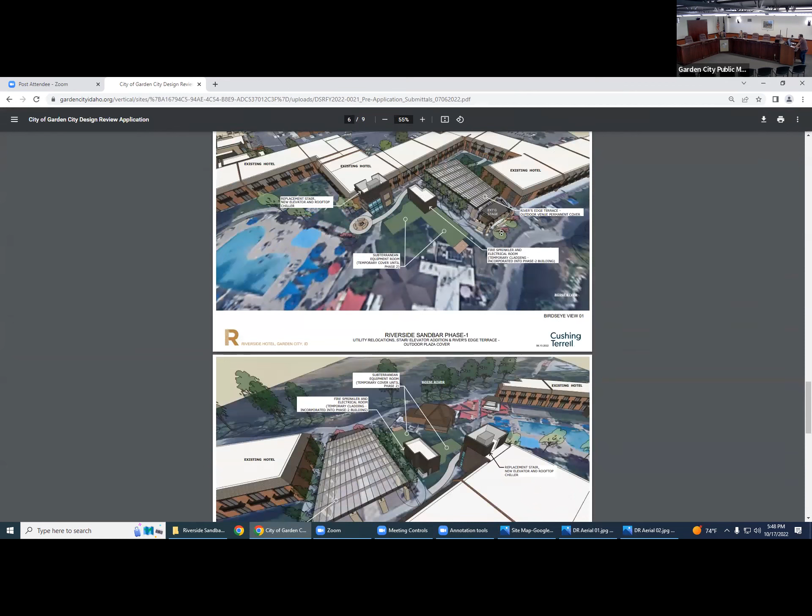So we have the River's Edge Terrace roof structure. Essentially we're generating a colonnade on both sides, flanking the wedge shape of the existing plaza, and having that clad with sandstone. Right now we're looking at an adhered sandstone of 2-inch thickness, similar to the sandstone on the porte cochere of the existing building on Garden Street.

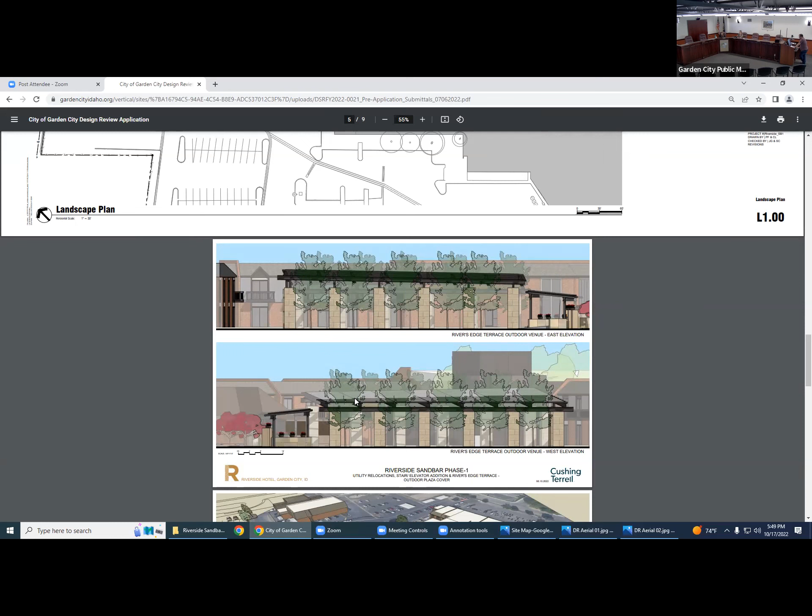And then HSS steel tubing, generating an exposed express roof structure with the Kingspan U-Light polycarbonate terrace roof system. It's a prefab product, similar to a standing seam metal roof, but instead of standing seam metal, it's a U-shaped polycarbonate with aluminum mullions, attached to purlins on the structure here.

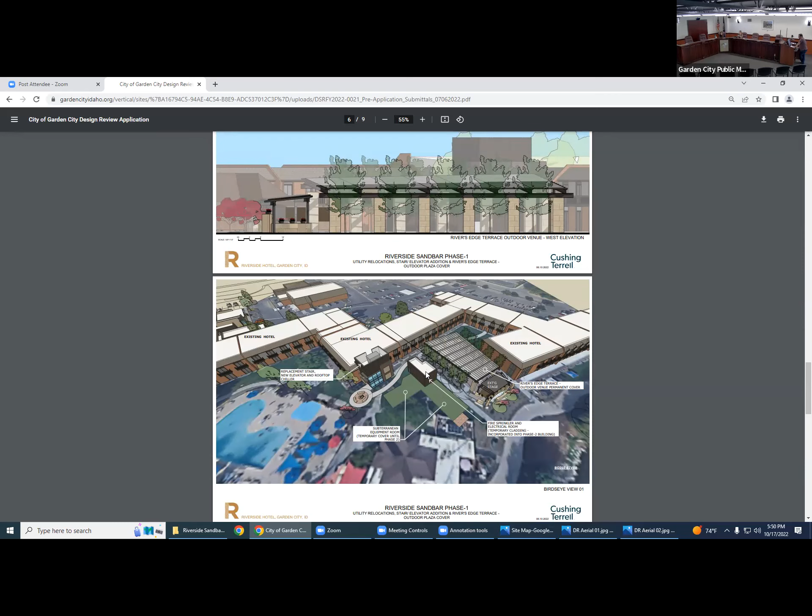This is the existing stair in that area. This plan shows the recessed basement with temporary coverage in the interim. If the project is phased, it will just be a temporary landscaping feature of turf coverage with light roofing on top. Then around here is the first phased utility building required, which will have the electrical room and the fire risers and fire sprinkler distribution room.

This is what we visited last time—the entrance 11 stair building with the brick, which is the dark masonry done around the building. There's entrance 5, the main entrance, and portions of the maintenance building and the new pool building that have this dark masonry, while this would be a true sandstone color.

I'm looking to see where on the website the latest documents are—unless I can pull them up, do you know? I can pull them up on a separate file. I don't want to cross documents. Is it 10-3? Yeah, it should be that combined submittal material 10-3. Up, up, up, up, up. Okay, there, this one? Okay, thank you.

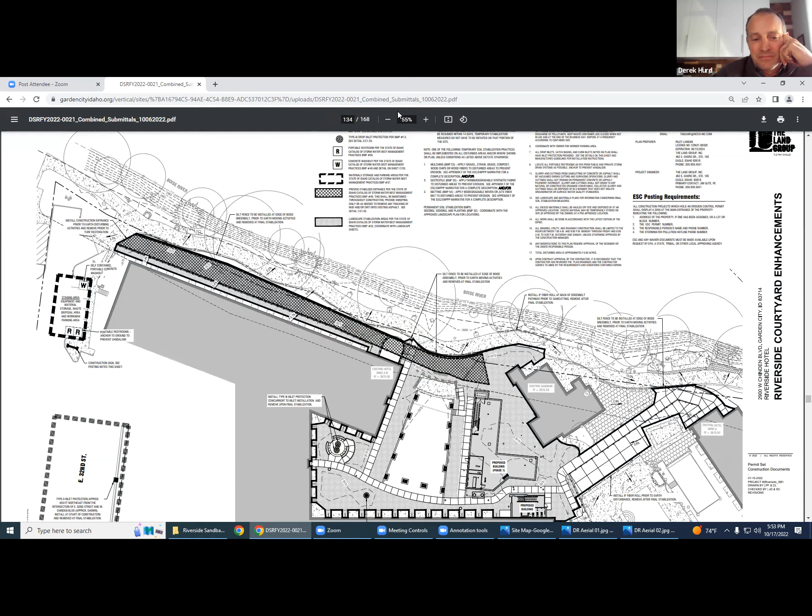If someone's looking at this, there's... the tree report's like 100 pages. Yeah, you got a ways to go. Sorry, I'll scroll a little bit faster, don't want to waste people's time. Okay, I think the point is there's a lot of trees on site. Let me zoom out here and see if I can get a better view.

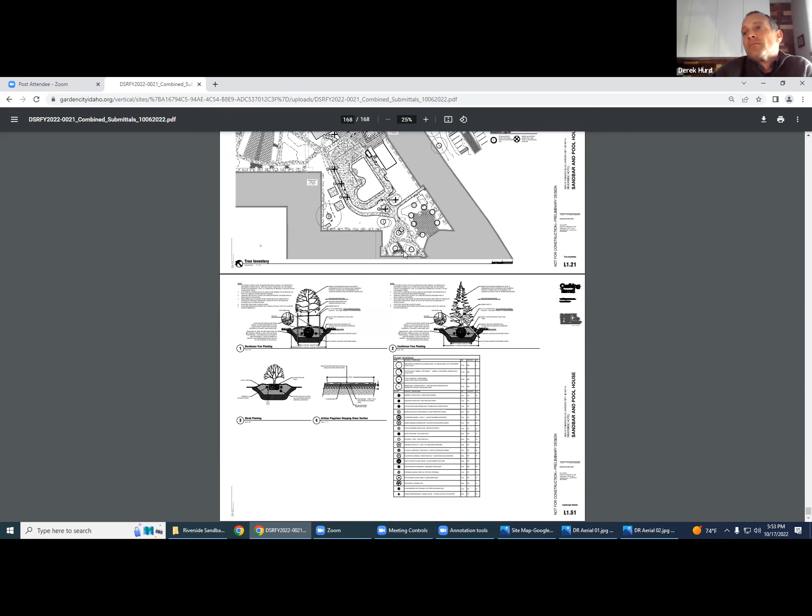Okay, I'm looking for the elevations. I think I'll just pull them up on my files. It's like page 155 in that doc. Okay, thank you. Okay, perfect. Okay.

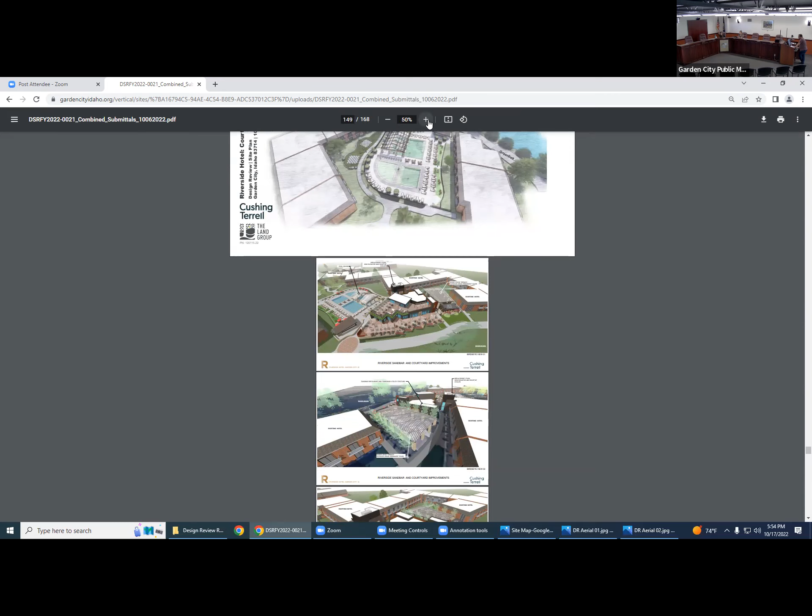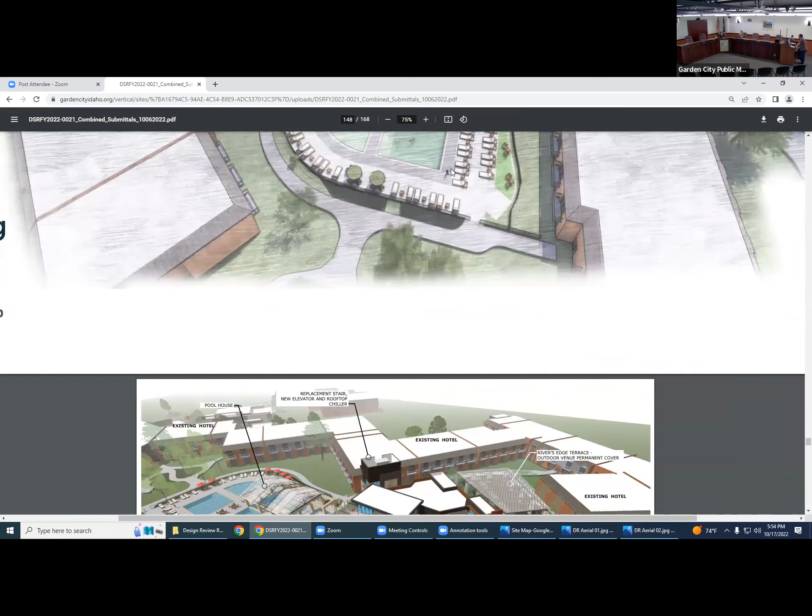So here's a bird's eye view of the landscape design, done by the land group. You can see the River's Edge Terrace, the sandbar—this is the kitchen portion of the sandbar building with an exit stair on the far side. This area here is the rooftop seating. We have another exit means of egress through a door going down a main feature stair out the main entry. This rooftop portion is where we're going to locate the kitchen equipment hoods and RTUs for the space.

So we're blocking that from the view of the greenbelt with a large wall here, and we'll do additional screening along these sides to limit the view for folks and visitors of the hotel and resort space. This is the chiller on top of entrance 11, tying into the existing building.

And then here's another view, more of a clear picture of the pool house and the translucent roof on that. And then we have the hot tub, a recessed ramped-down fire pit area, and then a warm pool right here.

And then this is a moderate temperature, essentially a normal temperature pool body, with swimming lanes going in this direction, and then a basking ledge here, and it tapers down to the deeper portion on this side. And then this is a little bit of a shallower adult pool, and then this is the shallow children's splash pad.

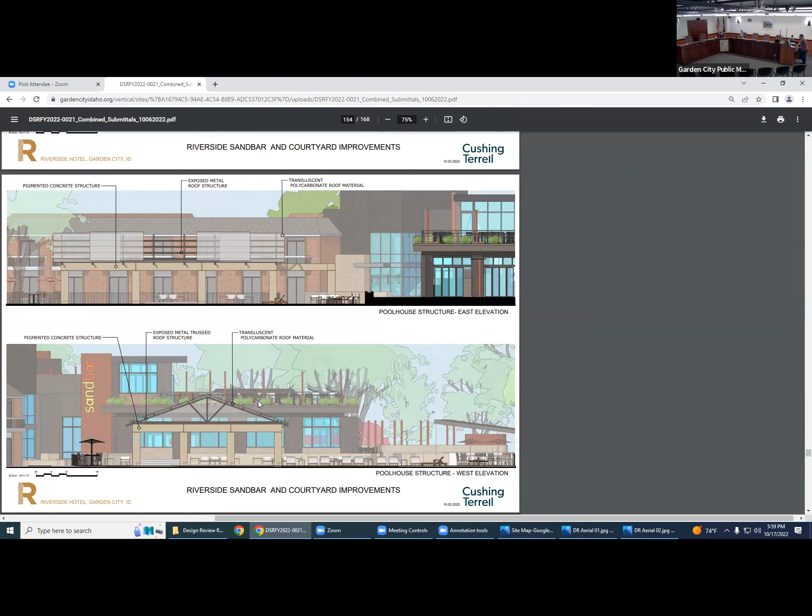Scroll real slow. So this is that colonnade element with the sandstone cladding for the RET, River's Edge Terrace. This is the pool house, which is integrally colored concrete and the steel framing system for the roof and the polycarbonate roof material there.

This edge is the greenbelt facing, river facing elevation of the sandbar. So we're indicating a feature point here on the corner with potentially a Corten metal with signage on that to indicate destination coming from both directions of the greenbelt, either coming from the north or coming from the south.

And then we have large floor to ceiling glazing in this facade facing the greenbelt. Our hope is to get transparency and lightness, a sense of the building from the vantage point of the pool and the pool house through and over to the river, to where you can see the greenery and the activity through the building, and trying to create generally a lightness with the overall facade.

This portion right here is essentially wood cladding, board and batten at this time. This is the space where you're transferring right in between the entrance 11, going from this entry node over to the RET. It's a narrow zone, approximately 15 feet wide, and it's basically very utilitarian in nature, in that it's a wall covering the kitchen.

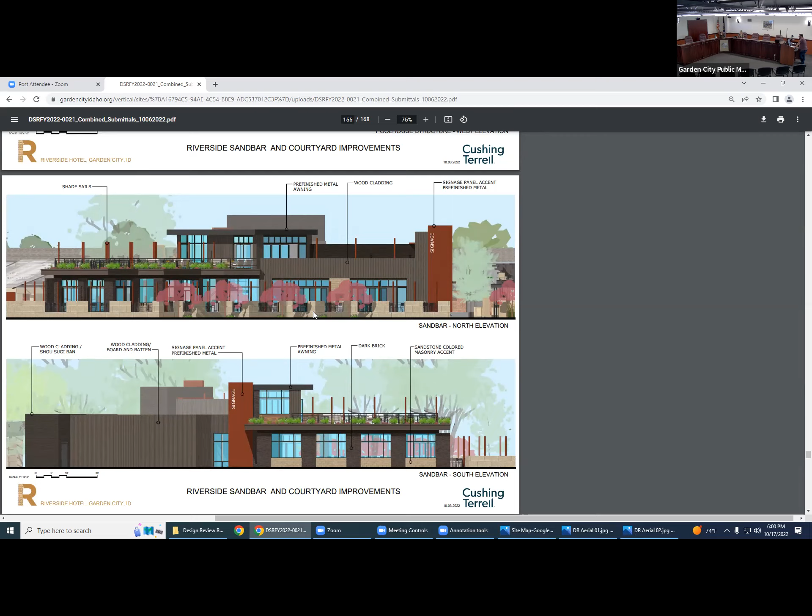And we felt like we wanted to put emphasis onto the entrance 11 building, which is on the other side of that canyon passing through there. So this is the main facade of entrance 11 that has dark masonry with natural stone cladding. And then with that cladding, we're going to play with textures to get a design that is artistic in nature and in corresponding with the Riverside's water theme.

And this is still something that is currently the vision and the goal, but it's still something that's in the works with the feasibility of this masonry veneer. But essentially it's a sandstone veneer, a cavity drainage system.

And with corner glazing with prospect view on the second floor, so you can look out and see the activity in the pool and activity on the rooftop of the sandbar, looking in the southeasterly direction from this vantage point up here. Let's see, this material up here is a Shou Sugi Ban, thermally modified Japanese cedar.

I mentioned this in our pre-app last time. It's a true authentic Shou Sugi Ban, truly thermally modified Japanese cedar, and it's a cladding system that will go on wood framing. And we also have this on the front of the building in the recently finished indoor pool and office building that's along Chinden. And let's see.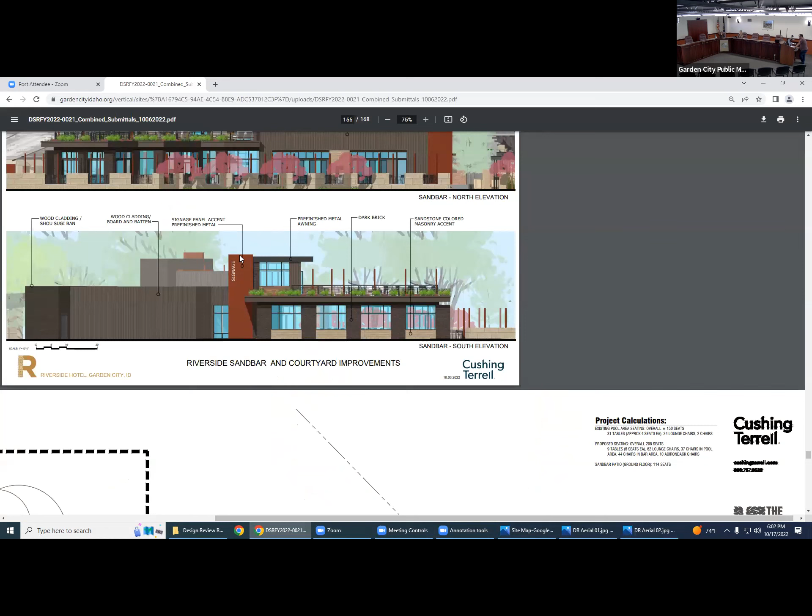This is the main entry feature where, when you're getting to the building from the main courtyard, exiting the building conference areas and these other variety of exits, you'll be led down the sidewalk with new fencing along the perimeter, drawn towards this signage feature. We're using these signage features on both sides of the building - the one on the Greenbelt side is here, and the one on the courtyard side is here.

Here's a view of that pool house, and then the sandbar in the distance. We're trying to limit the mass of the building by keeping the open space on this side and coupling up the second volume, the second two-story high volume, that's kind of being hidden by the gable roof of this pool house, keeping that transparency and getting a sense of the vegetation along the greenbelt.

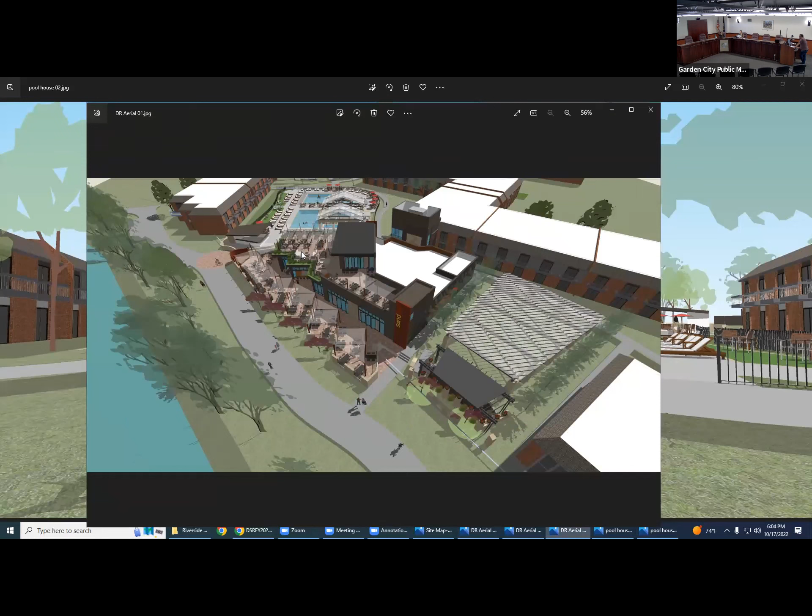This is a vantage point looking from the exits of the building, looking back this way towards the sandbar. You can see the openness that we're striving to provide here, and the low height with the shading structures, which is fairly necessary for this space in the summertime when it's highly utilized.

This is that vantage point along the fence going from the main hotel out towards this central node. Entrance 11 on the left, signage in the middle indicating destination, and then this node indicating a direction to go left towards the River's Edge Terrace, or over to the Greenbelt to the right, or entering the restaurant right through these doors.

I don't know if I need to touch on anything else. Okay, so I think that's all I have. I'd open it up for discussion on findings and questions.

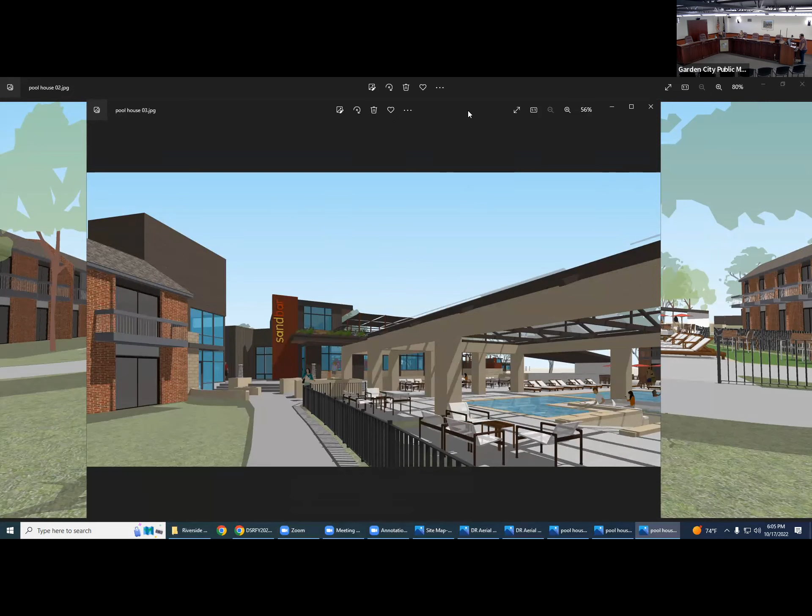Thank you. Any questions? The applicant. I do have a question.

How wide is that expanded width on the Greenbelt now? Proposed, it is 16 feet. Oh, that's it, just 16? Okay, yes, 16. And how wide is it now? It fluctuates between 10 and 12 feet. Okay, thanks. Absolutely.

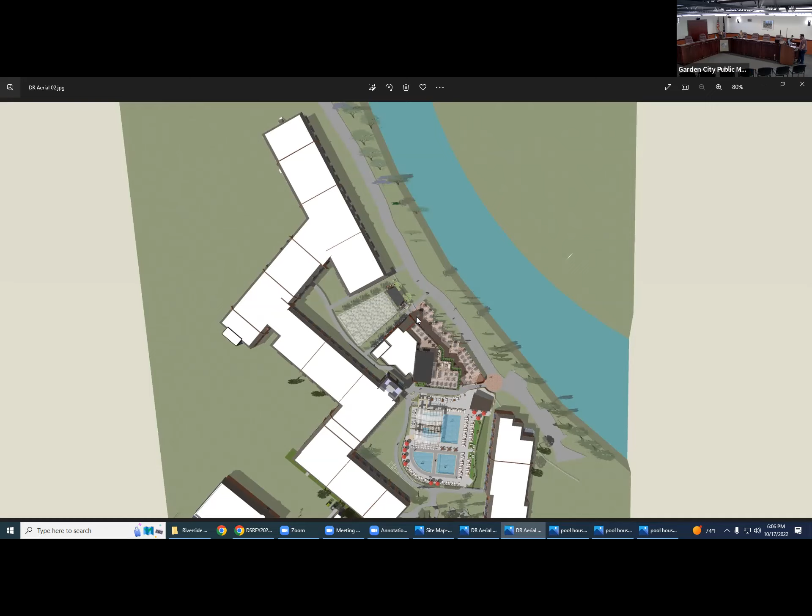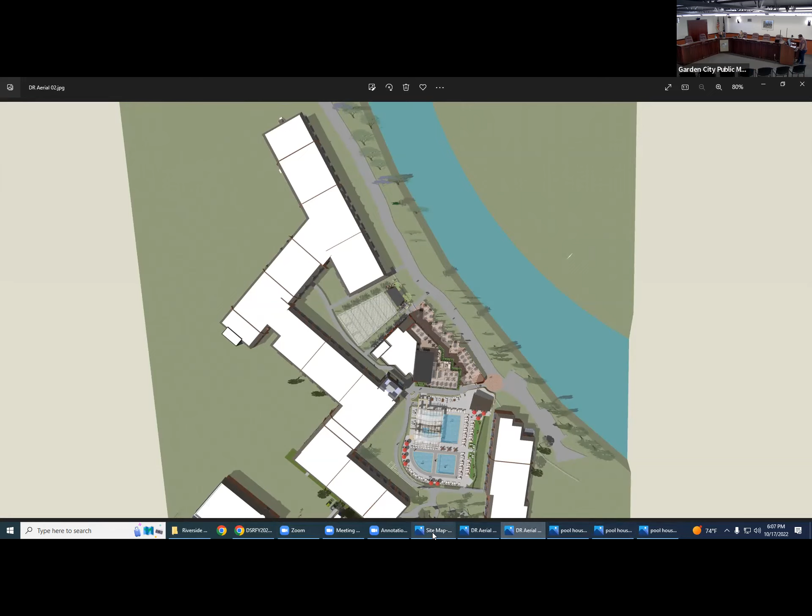And how does the restaurant get supplied? Yeah, so the restaurant is operated by the hotel, it's an entity of the hotel. It is supplied by catering services, which either get access through the hallway here and through entrance 11, or through the main - let me pull up this, so basically this is their large kitchen.

So they have the banquet kitchen here, which serves all of their conference spaces and current events. They will supply it either through this pathway system over to the restaurant. But in the case that this is a full functioning restaurant, they will get deliveries through here. The catering services will be much less than what they currently are, because the current kitchen is partially supplied by goods from the banquet kitchen in terms of cooked goods and food supplies. So they'll have a larger quantity for dry storage, food storage with coolers and those types of things to limit the ongoing transfer of food and services to the restaurant.

It will be more like deliveries early in the morning, and trash will be taken through and taken out of the space to the area over here where they have the facilities for the loading dock that was built in the indoor pool and fitness building. I don't have an aerial view of that, but we have screened areas with dumpsters on both sides of the pool building and a loading dock area that we developed with the last indoor pool and fitness building to screen all that functional use. Thanks.

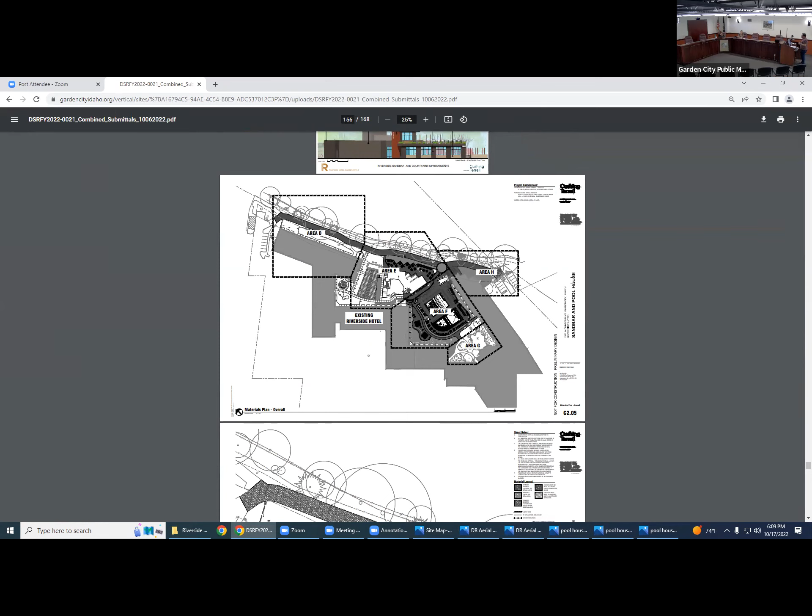I will try and keep it short and sweet. I think the applicant did a wonderful job describing all the improvements and changes that the application is proposing. Essentially, the courtyard construction consists of about 14.4% of the overall site area. The overall site area is considered to be the entire parcel of the Riverside Hotel, so it is only a small fraction of the overall site.

Because of the percentage and how code has different thresholds of design standards, essentially when an improvement or site application is less than 25% of the overall site, only the improvements need to meet code standards. So the rest of the Riverside Hotel is exempt from code required improvements. And that is how the staff report is analyzed.

With that said, there was mention of the 16-foot wide asphalt path, the greenbelt pathway, being enhanced. In addition, the intersection of the greenbelt and the primary entrance of the proposed redevelopment consists of permeable pavers now, designed in a circular fashion.

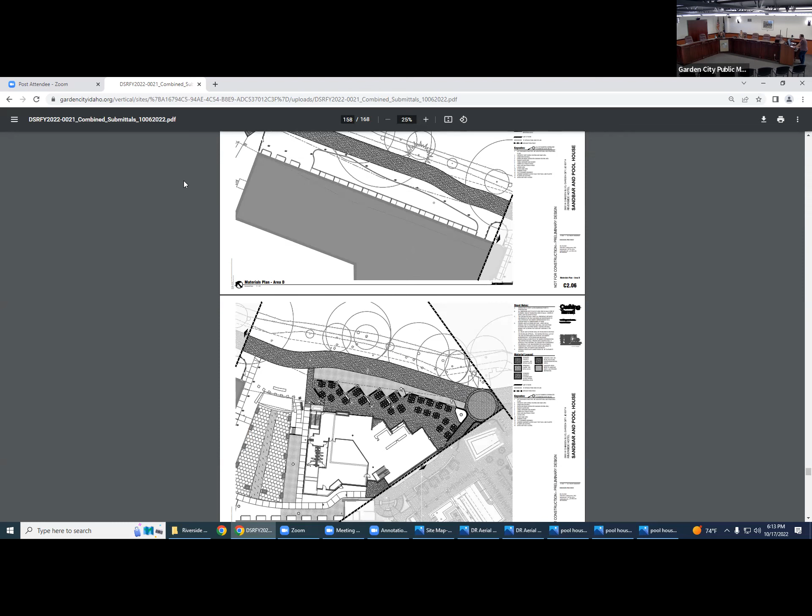The applicant has submitted tree mitigation plans, and essentially the way staff was able to calculate it was that phase 1 proposed 54 caliper inches to be replaced when 64 caliper inches are being removed. However, in phase 2, the pool side renovation, once completed, proposes a sufficient amount of caliper inches — I believe 120 inches total — to make up for the 64 caliper inches lost. So eventually, between the two phases, there is proper mitigation had on the site.

One last comment regarding the property signs identified in the renderings: staff did not analyze those signs as part of the application, so I'm not sure if they are compliant or not. It's likely we would require a master sign plan at a later date when you want to install such signs on the site.

Any questions for Ms. Veal? I do not. All right, thank you.

Are there any members of the public here who wish to testify? Seeing none, I'll turn it back over to Mr. Hallowell for any rebuttal he wishes to provide.

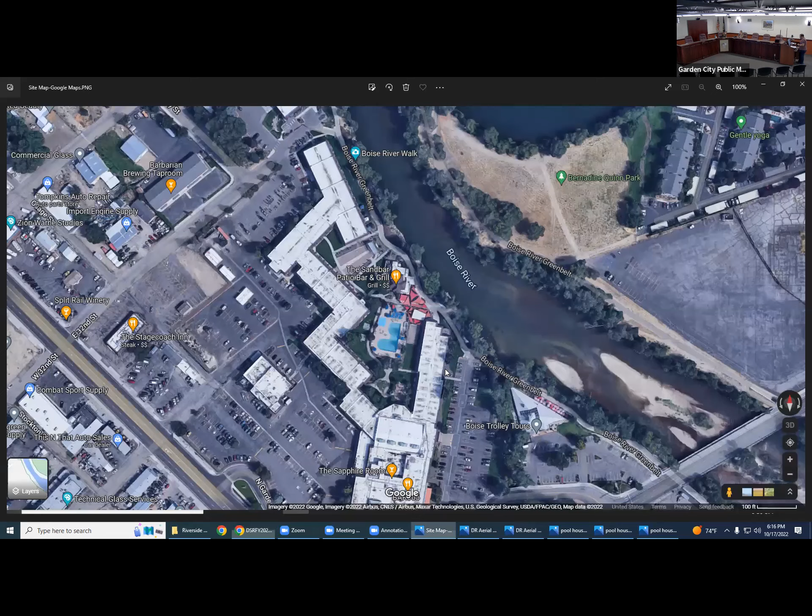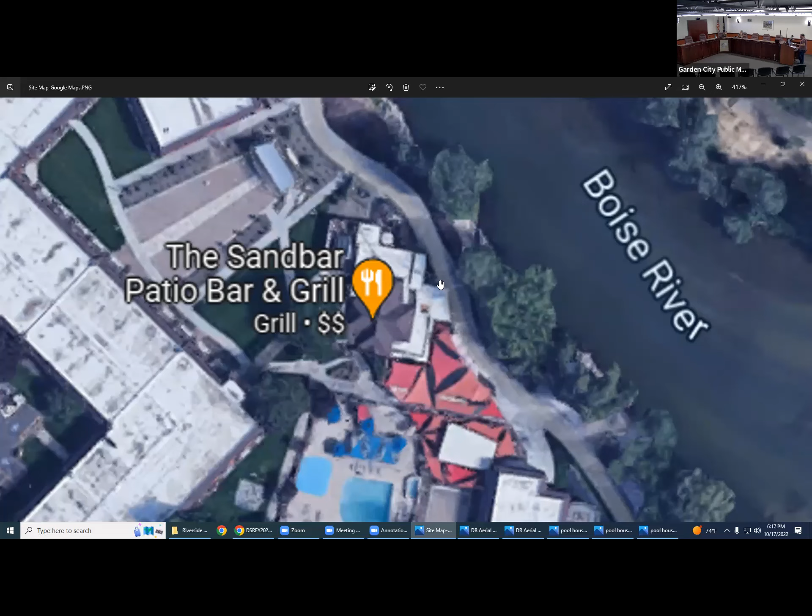With that, we acknowledged there's a safety issue currently with the width of the greenbelt and the fence line along this perimeter. It would be better if I show this on the site map, but there's essentially a fence line that's pretty harsh — streamlined or inarticulate — running from this point all the way to that point. What it does is give folks the urgency to just pass by quickly. The hotel has had a concern and has experienced people getting injured at this vantage point, where it's not clearly indicated in its current state that this is a location where people will be transitioning, because it's a confluence of pathways without a direct delineation of that confluence.

So we're hoping to address that by creating the circular element here, and then folks will know that this is a transition zone, be aware of your surroundings and those types of things. But in regards to the quick speed that they experience with people passing by here, our design solution was initially inspired by developing a sawtooth type of

features that will create an undulating facade of the fence line. So we're pulling the fence line off of the green belt and then creating zigzags with sandstone fencing, and then creating transparency and places for water to flow in case there is a flood event, water to flow off of the patio in these open metal fence portions here.

But the design idea is that this will create moments of interest and also areas of refuge by having the fence pulled off of the green belt and giving people the ability to shuffle away and outside of traffic, or take pause and kind of observe the surroundings with a little higher frequency. So this was essentially the design idea from the beginning.

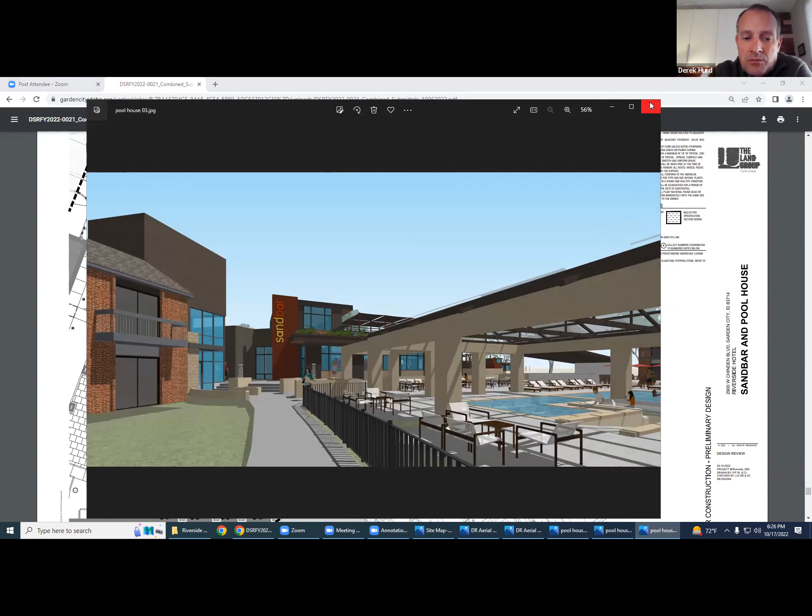So to be clear, this is the pre-app where we just reviewed the stair tower and mechanical tower. And since then, the restaurant has come into the application. And as such, the staff report does not reflect all of the restaurant code review. Is that correct?

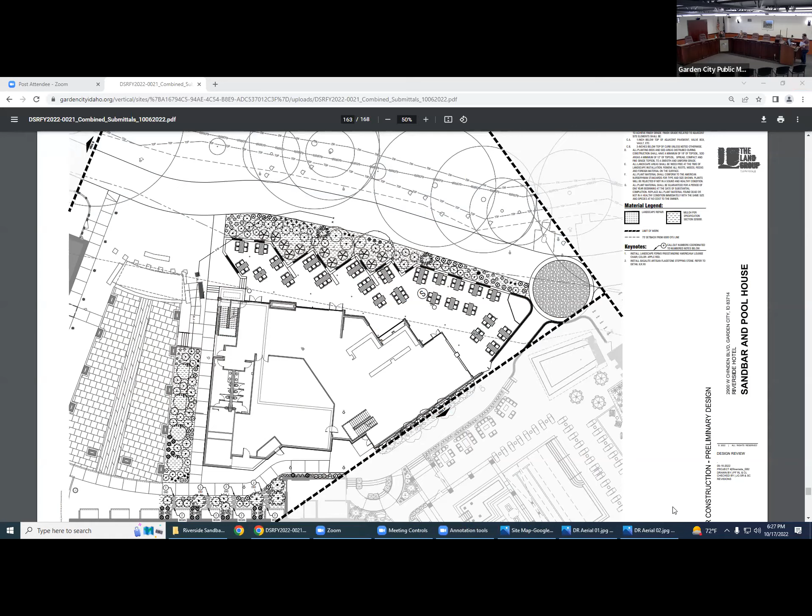I think it really helps seeing the whole picture of where this, the master plan of where it's going. Yeah.

And I think architecturally, there's a lot going on. It's a busy site with a lot of different program requirements and whatnot. There's nothing that jumps out at me architectural wise as far as the restaurant's concerned, or the stair tower, which is now kind of buried back within the restaurant program.

The street front is the green belt. So that's our biggest concern, how the property interacts with itself internally is less of a concern, and also triggers less kind of code requirements that we review. So I'm obviously looking more heavily at the green belt and that interaction with the public.